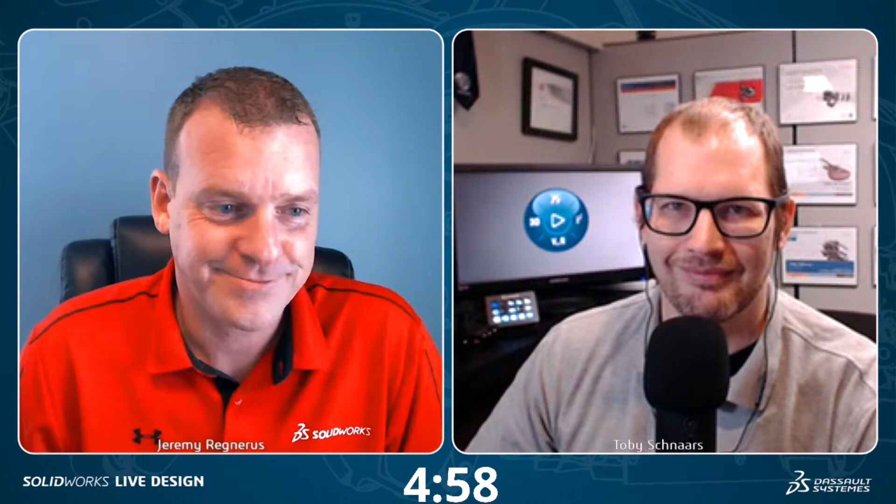Okay, so 3, 2, 1, I'm pressing go live button. So the other thing they talked about, so not only was it like these two college brothers basically started Pizza Hut, they then went on and, we're live, they talked about the guys who started Domino's. It was really, really cool.

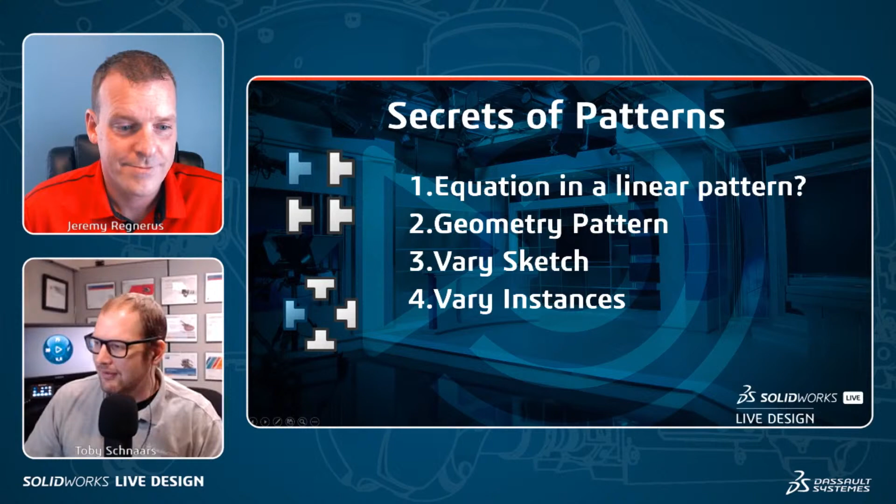I'm going to jump into SolidWorks Connected, and we're going to take a look at our first example, which is a linear pattern where our goal is to create equal spacing from the end of the part to this first hole and the other end of the part to this last hole, and to have that value derived from the overall length and the number of holes itself.

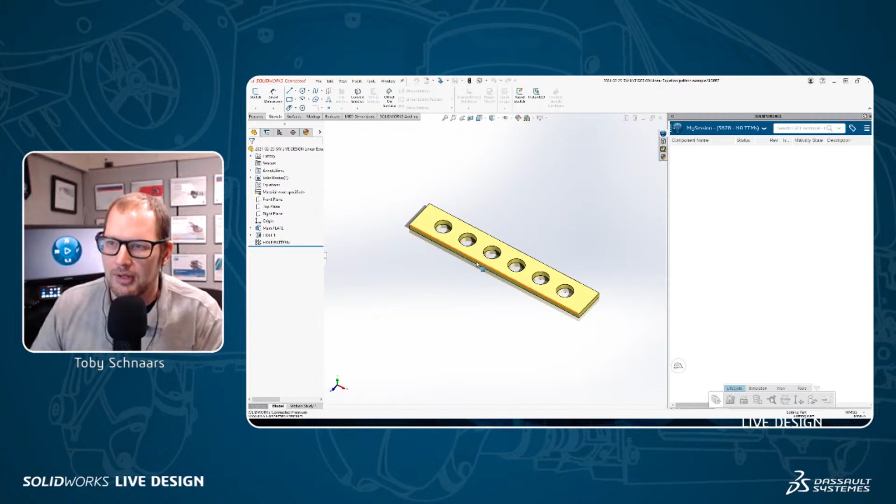So we're going to take the overall length of this part. We're going to divide it by the number of holes. That's going to give us some equal spacing. But we also want that to incorporate the distance from the end of the plate. We want that to be uniform. We want the distance off of each end to be the same.

So I'm just going to start a new part here in SolidWorks Connected 2021. From this new part, I'm going to jump into a top plane, begin a sketch, orient my view, pretty much the same workflow every time, right? Select a plane, begin a sketch, orient your view. When you're using SolidWorks, one of my favorite things is to use auto dimensioning. So I'm going to make this 30 by 160. I'm kind of shooting from the hip here a little bit, Jeremy.

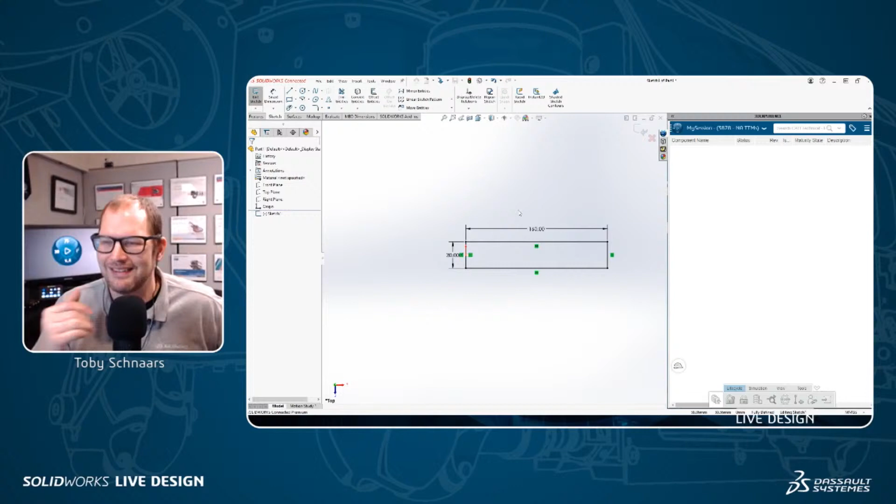So we're going to take this guy here and make it midpoint, and I'm going to be doing equations here. I've watched a lot of your presentations on doing equations, and one of the tips that you've given that I think is really good is that when you're working with equations, you can rename your dimensions.

So I'm going to make sure that Instant 2D is not turned on, because if Instant 2D is turned on, when I click on the dimension, it's going to put me into an edit function. So Instant 2D is not turned on, and then I'm going to click on that dimension, come over here, and call this dimension width. So that's the width of the plate.

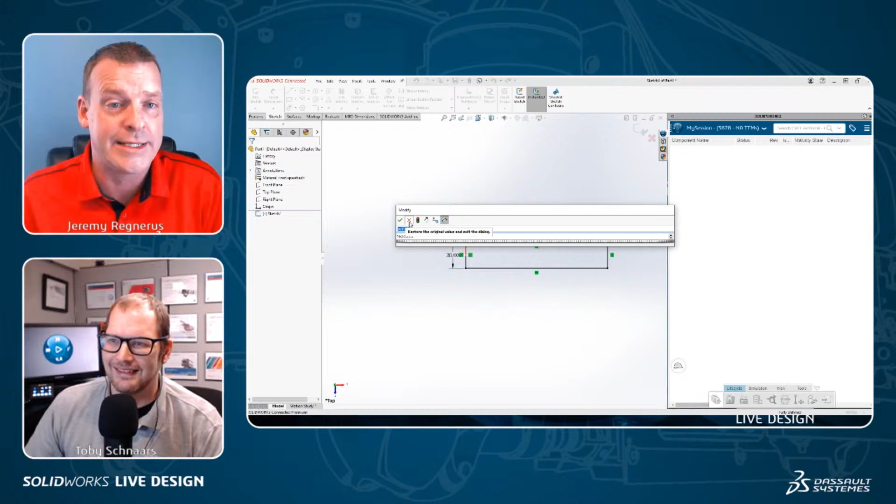So Toby, can I show you a pro tip here that you can do while Instant 2D is on? I don't mean to detract from what you're showing. Please, go ahead. Turn on Instant 2D. Okay. Quickly double click on that dimension. Yep. See, you can still name the dimension up there in the modify dimension dialog box. So that's a tip for people watching. Yes, you can do it in the property manager, but you can do it right there too. Yeah, you don't even have to go over to the property manager.

I'm still going to turn off Instant 2D because I got beef with Instant 2D for other reasons, but sure, we can talk about those in another presentation. And then I'm going to take this rectangular plate here, and I'm going to do a reverse direction and bring that down. And then I'm going to go to the upper surface there, begin a sketch, orient my view, maybe make a diameter circle here of 15 millimeters.

We're going to set that up so it's right in line with this existing origin, which is at the center of the part. And then we're going to create another dimension here that comes across. And I'm going to say that's going to be, I don't know, let's make that 22 millimeters. And now that I learned that new pro tip from you, maybe I'll press my luck a little bit and I'll call this one offset, because that's the offset from the end, right inside of that dialog box. Yeah, that looks pretty good.

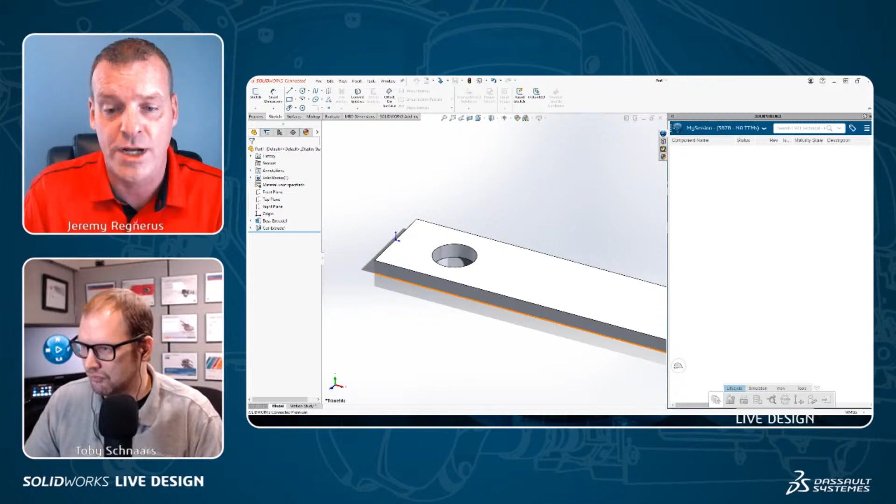By the way, Toby, Eric Beatty's in the chat. He says, dare I say at Too Tall Toby, am I starting to see a pattern here? Well, shout out to Eric Beatty. He's always in the live streams. Yeah. Super power user. I see a pattern of Eric Beatty all over 3D Experience World this year. Yes, man, you were all over the place. That was awesome. So, all right.

So we got our first hole here in this model. I'm going to just kind of close this property manager, its task pane over here. Now, what this task pane is doing over here is it's just giving me some additional access to maybe some additional tools. But I think for now, I could probably just kind of minimize that so that we can keep going here on this first example.

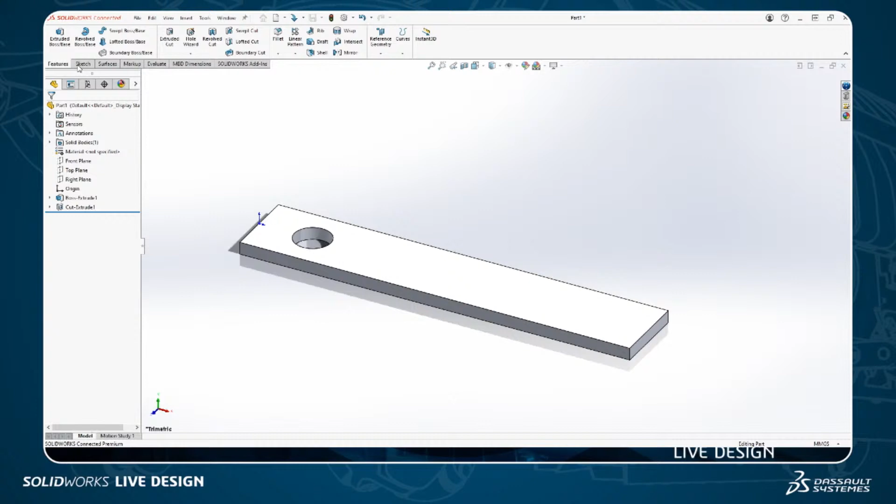So what we're going to do with this first example now is we're going to take this hole and we're going to do a linear pattern. So we're going to go here, features, linear pattern, and we're going to say it's going to run along this edge, and the feature that we're going to pattern is going to be this hole, and we'll say maybe this is going to be 25 millimeters for the spacing. All right, that looks pretty good, right?

Kind of gets us started, but we didn't incorporate any of that cool functionality we were going to talk about, right? So let's say we're going to go to the number of instances here in our pattern, and we're going to go to the spacing in our pattern. And just like we did before, we can rename them either over in the property manager, or we could rename them by double clicking on the dimension. Shout out to Jeremy for showing me that tip. So this would be number of holes.

And you can see here that now we can double click on the spacing, and we can say, instead of this being 25, we're just going to type the equals on our keyboard. And we can come down here and we can single click on this plate, and we can single click on this dimension. And now the spacing in that pattern is going to equal the width of the plate. Well, that's not exactly what we want. So let's type the little slashy here for divide.

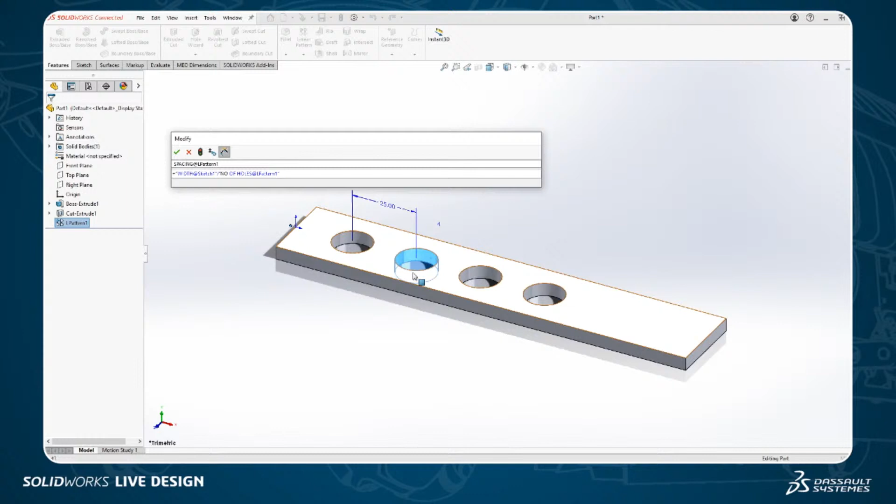And then we're going to click on the feature that represents the linear pattern. And we're going to click on the dimension that represents the number of instances. And so now we can see that the spacing of the holes is going to be derived from the overall width of the plate divided by the number of instances in the pattern. So we hit the green check mark and we rebuild, and wow, that's amazing. Look at that. It's automatically updating that spacing. If we change the width of the plate, it's going to automatically update.

And at first glance, it kind of looks like it's good, but upon further inspection, what you'll start to realize, and you can kind of even see this in the results here, is that the spacing from the end of the plate is not quite correct. So, for example, if I was to change this to 7 instances, we want that spacing from the end of the plate to be the same.

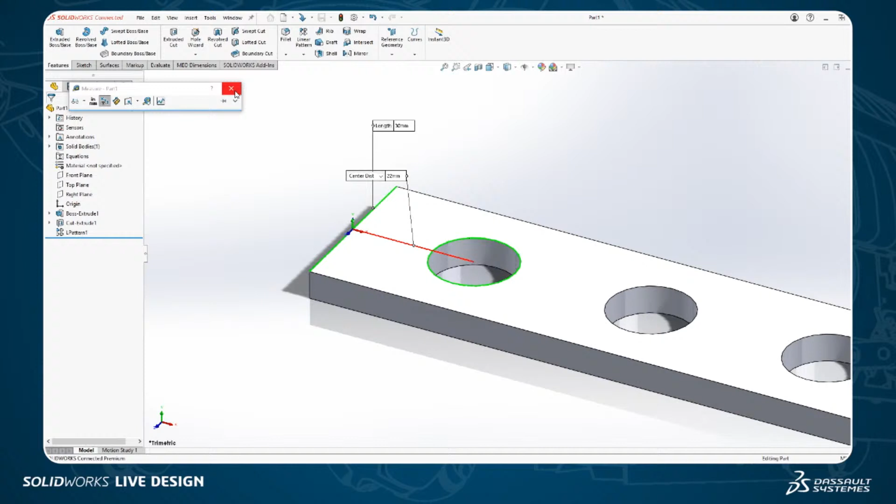One way that you could kind of quickly see this is you could go into your measure command. So I'm just going to go S key, and I've actually added measure to the S key. And then I'm going to click this circle here and click this edge. And we can see that offset is 10.14 millimeters, when it's supposed to be whatever we created on this end. So the actual equation that we have to put in there is a little bit difficult, not super difficult, but it's a little bit difficult, right?

Basically, what we need to do is we need to say that we want this distance here and this distance here to be subtracted from the overall plate. So we want to take this overall width here, and then we want to subtract 2 times this distance. Let's say it's 2 times x. So we want to take the overall width and subtract 2 times x, and then we want to divide that by the number of holes, but we want to eliminate one of the instances of the holes because the first instance of the hole is already accounted for with that initial offset sketch.

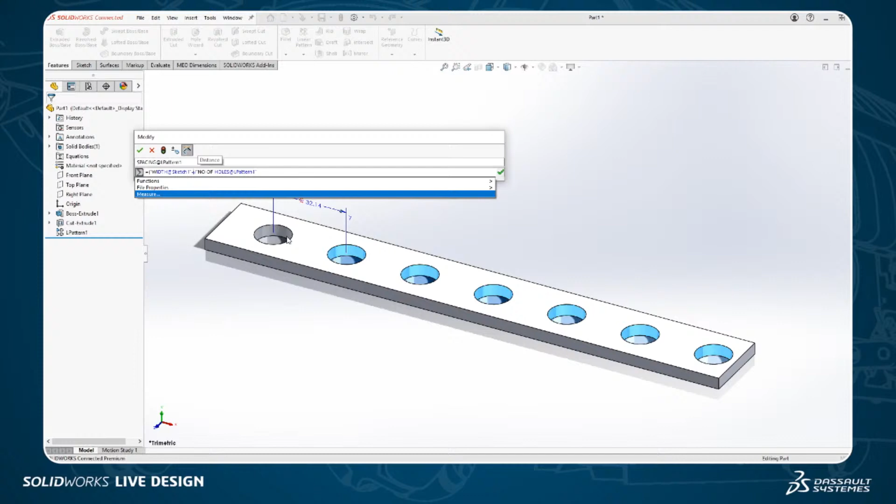So the equation starts to become a little bit cumbersome. It ultimately ends up looking something like this. This spacing here that we're trying to auto-calculate is going to equal, and then we'll do parentheses here, the width of the plate minus the original offset distance times 2, because we want it to be offset from both sides. We want it to be the same. And then that's going to be divided by the number of holes, and I'll do another parentheses here, and I'll do minus 1 and then another parentheses. And we'll see if we got it correct. Looks like my syntax is off a little bit there.

So this sounds kind of hard what you're doing right now, Toby. This is a lot of work to put this together. It's a lot of work, man. In fact, I'm gonna cancel out because you're gonna sit there trying to get it to work, and ultimately you might run into similar issues where it just doesn't work for you, or you just can't get it, or you're spending quite a bit of time trying to figure out what is it that I'm missing, what step am I missing.

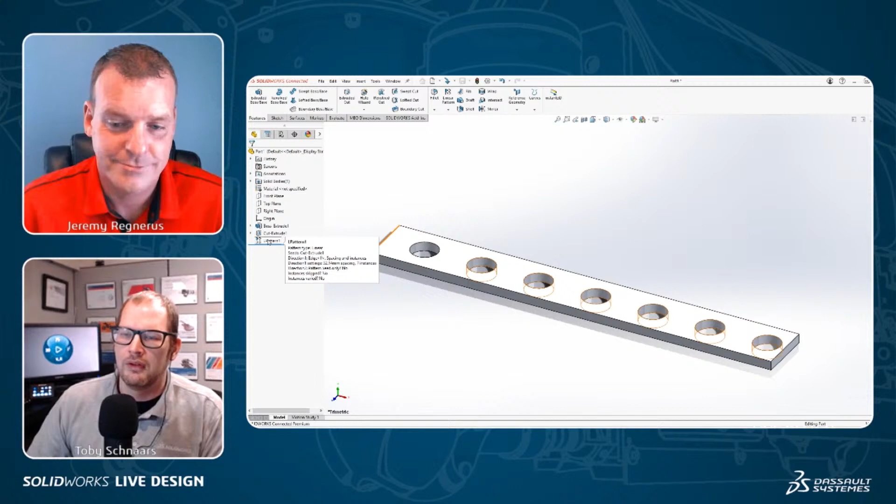So instead here, what we can see is that if we go into the linear pattern command and we say that we're going to linear pattern from this edge here and we're going to linear pattern this feature, we could actually go right up here into the linear pattern dialog box. And in the linear pattern dialog box, there's this option for up to reference. So instead of having a distance between each instance and a number of instances, what you end up with here is what's the reference that you want to go up to? Well, I want to go up to this final face here.

And then you get this option down here for, do you want to have equal spacing between the holes, or do you want to have a total number of holes and then automatically let SolidWorks calculate the spacing between them, which is the exact equation I was just struggling with, couldn't get the syntax right, didn't know what I was missing. On top of this, you can even do an offset. So I could say I want this to be offset 35 millimeters from the end. So now this distance from the end to this hole is going to be 35.

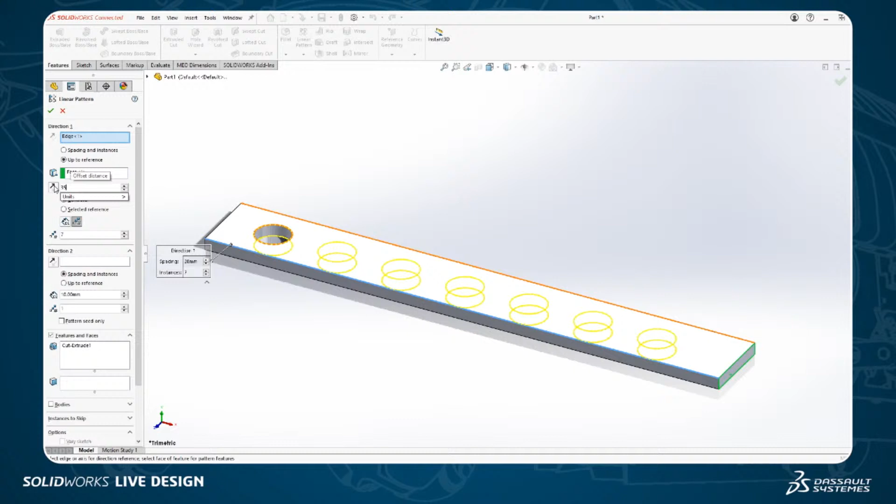And it doesn't look like 35 was right, and I can't remember what the original dimension was that I used. Well, we can go right into this dialog box and type equal, and then click on that first instance to get its dimensions to show up, and click on the dimension that represents that first instance. So let me just make that 35 for now. The dimension's not showing up, so I'm going to leave it at 35, and then double click on that linear pattern. I'm going to double click on this dimension here, type equals, and then click over here on the first feature, and click on this dimension.

So my offset from this end over here is now set up with an equation to equal my original offset from this end here. So I'm going to hit the green check mark. Rebuild, boom, good to go. So cool, right? This is so easy.

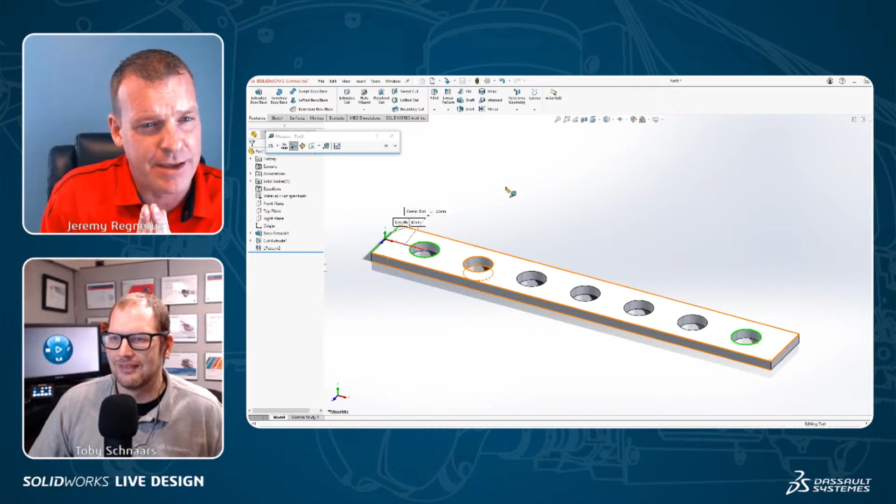So this was like a stealthy little feature that got added. I don't remember. It's probably been within the last 4 releases, I want to say, maybe 5. I remember when this came out going, every machine designer who has to build a block with equal space holes on it is going to love this thing.

It works so good. It's like you said, it's kind of one of these things that's just been added into the software. Maybe you didn't realize that it was added here, and you can see that what we end up with is just right in this dialog box, this little tiny addition here, this up to reference that makes all the difference and can really simplify your life.

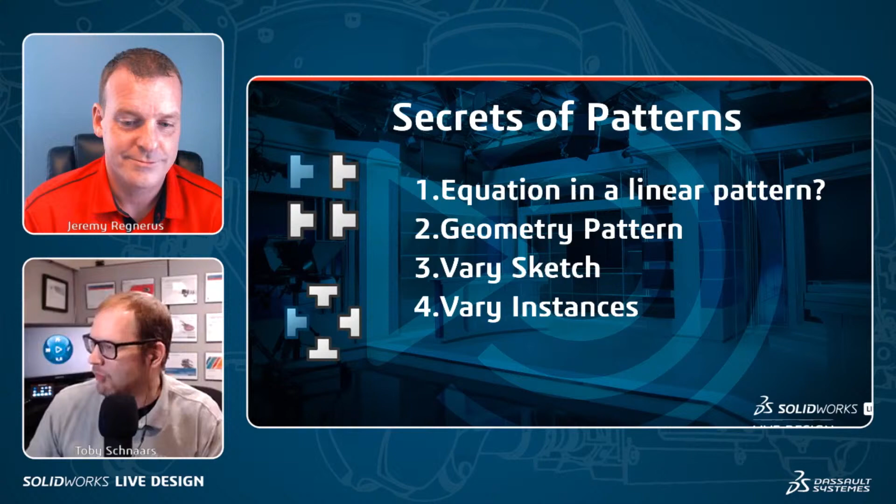Yeah. So at this point, I'm going to jump into the geometry pattern discussion, because we've all gotten this error before with geometry pattern, and we're trying to figure out what exactly is happening there. Why are we running into that error with geometry pattern? And so what we're going to see is the reason that error shows up, the challenge that you run into when that error shows up.

Can we show that error so people can see what we're talking about? Absolutely, yeah. Let me open up a file here. You can see this file is coming in read only because I'm actually managing this with data management in the cloud, and somebody else maybe is working on this file, so I'm being blocked from making changes, but we can still take a look at what that error looks like. And then maybe in a little bit I'll reserve this file so I can start making changes, because I think I got some revisions coming up for this file.

So you can see the anatomy of this file, the way this file was created, was that it started out with this main base shape. As I roll forward in the tree, we have this little set of divider slots and then these upper pockets. Now, the offset on these upper pockets is a little bit different, and that's why I didn't include that in my linear pattern feature. I've created this inner pocket, then a half circle boss here, and then some little fillets on the corner. My goal is to take this geometry and lay it into all these other pockets.

So I'm going to jump into the linear pattern command, click on this little edge here, and specify my spacing. I'll say that my spacing here is 50 millimeters, and there's 4 instances. I'm going to come down to my features and faces, and then choose those features, maybe from the graphics area or maybe from the tree.

Either way, I can get those features. Ooh, my pattern preview looked like it was there at first, and then it kind of went away. Yeah, what happened with that? I don't know. It's weird. When I click full preview, it goes away, but when I click partial preview, it's there. So I don't know. It'll probably work, right? So we'll hope that partial preview fixes it.

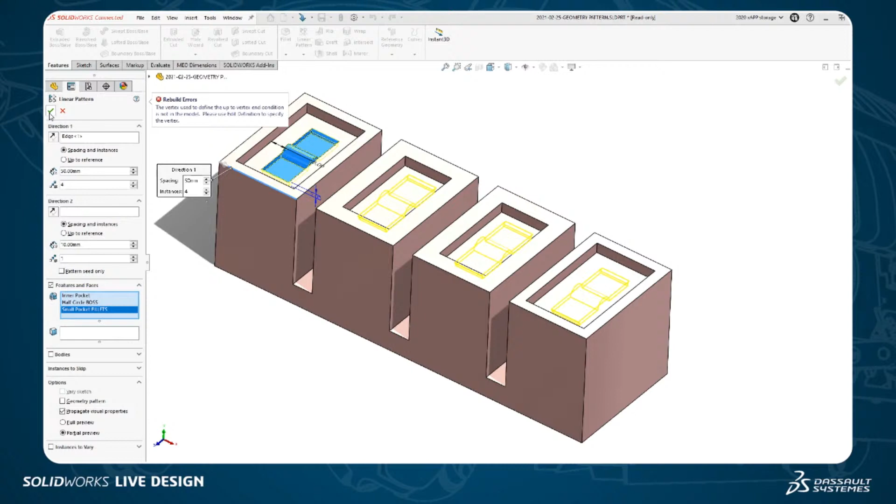So we'll hit the green check mark here, and when we hit the green check mark, we see rebuild errors. The vertex used to define the up to vertex end condition is not in the model. Please use edit definition to specify the vertex. And a lot of times what you'll see is kind of a similar error here, where you'll see something like pattern failed to create, try to use geometry pattern.

Like in this example here, if I wanted to take the spoke here and create a circular pattern of the spoke. So I'm going to do a circular pattern here. Let me go before I put that hole in the middle. We'll do a circular pattern here of this spoke. And from the circular pattern here, we're going to say we want this to be equal spacing, and we hit the green check mark. And it says, pattern for sweep with guide curves is not currently supported without the geometry pattern option. Try using geometry pattern option.

Now, believe it or not, both of these errors, even though they're saying something slightly different, the culprit in both of these errors is the same thing. And the culprit is the idea of geometry pattern, which is really a derivative of the idea of a pattern that tries to solve for end conditions dynamically.

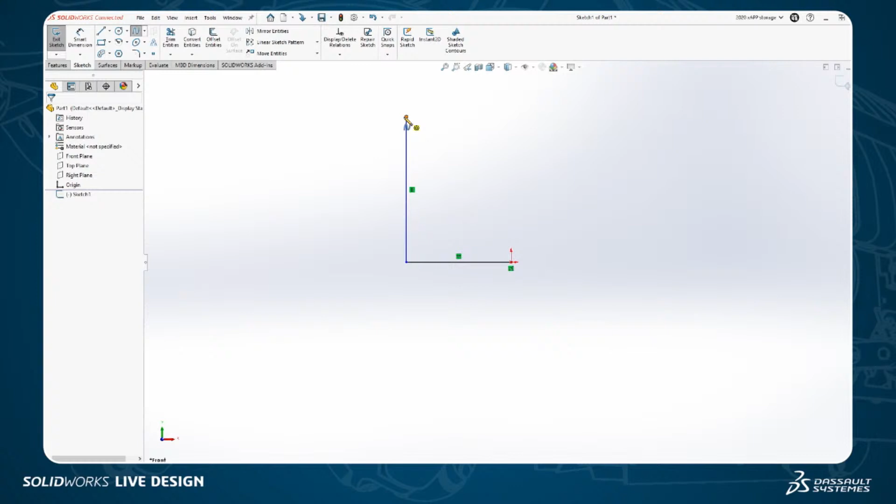And what that means, and really how you can visualize that pretty easily, like if you're talking to a coworker and you're trying to explain this, what you could do is you could create a set of geometry that has some kind of a unique topology. Usually I'll do something like this. Like I'll create a little spline here off the top of a thin feature extrusion. And you can see that I can bring out that thin feature extrusion like so.

And then what I'll do is I'll pick this face and begin a sketch of a circle, and I'll extrude that circle up with a dynamic end condition. So what I mean is something like an offset from surface. So I'll go offset from surface here, and I'll pick this face right here. And there we can see our extrusion going up. Let's say we're going to bring that off 50 thou from that surface.

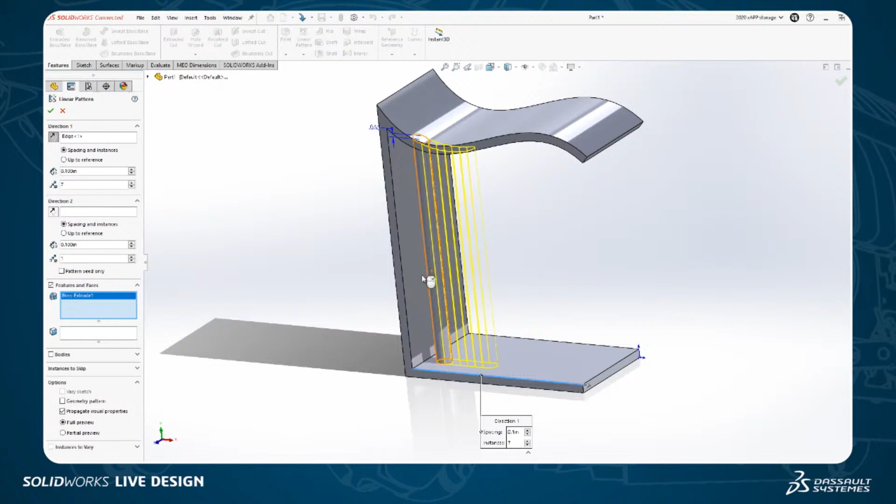Now we're going to create a linear pattern of that boss extrude. So we go to create a linear pattern of this boss extrude. We say we're going to go in direction 1 here. We say that we're going to use this boss extrude as the feature. And we say we want our spacing to be, say, 0.1 inch. Looks like a pretty cool pattern. I'm going to hit the green check mark, and whoa, that's kind of cool. That's awesome, Toby, that it will follow that surface on every instance.

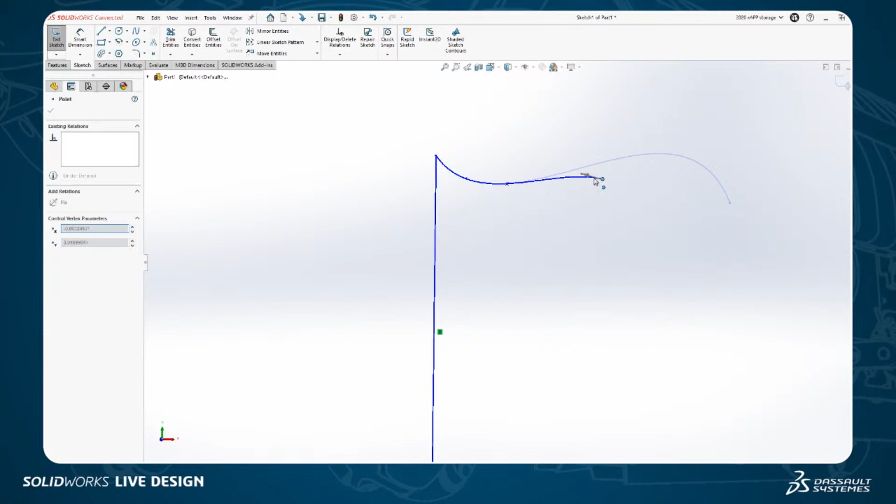Exactly. The end condition, the dynamic end condition is solved throughout the duration of the pattern. So this instance is doing offset from surface. So is this one. So is this one. So is this one. So that's beautiful unless this spline doesn't extend out far enough. When that spline doesn't extend out far enough, that's when you start running into issues. So for example, if I was to dial this spline back a little bit here, like so, let's see what happens to our pattern.

Uh-oh. The end face cannot terminate the extruded feature. Please recreate the feature using the geometry pattern option if intended to mirror pattern the feature onto disjoint bodies. So you'll notice here that over the years, the team at Solidworks has done a great job of trying to give you a variety of dialog boxes that will maybe help you to decipher what's going on with this error. But ultimately, they're all saying the same thing. You've got some kind of a dynamic feature in your base feature, and it can't solve in the patterned location.

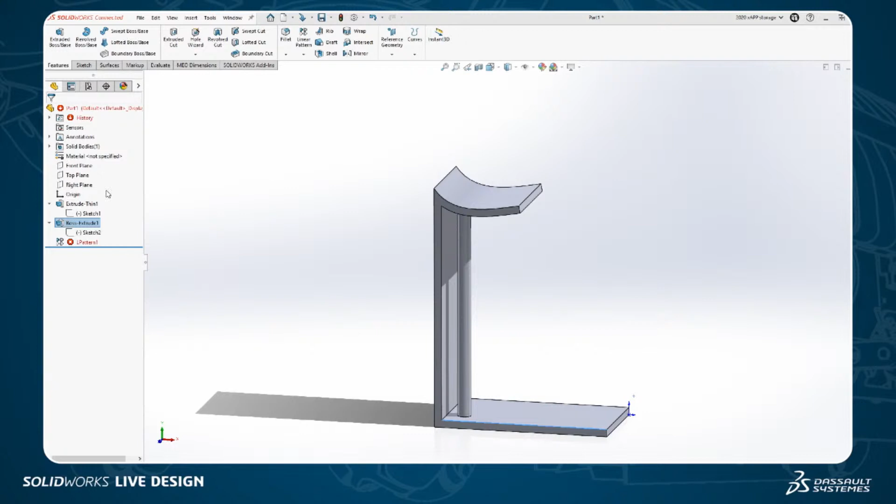That might be that you're doing a fillet and the faces that you're trying to fillet onto don't exist in the new location. It might be an up to surface or an up to vertex, and that vertex doesn't exist in the new location. You know, there's a number of reasons why this might happen. But ultimately, what you'll see is if you go into the edit feature command on that pattern and you choose the option for geometry pattern, what you get is an exact duplicate of the original.

And so this is why you will see that suggestion often, and this is kind of how you can work around it and what the result is of working around it. So if we return to the spoke example, and we go to create our circular pattern of the spoked features. So we got our spoke sweep, our spoke fillet 2, and then we've got our direction 1 right here. And this time we're going to say, let's do this with geometry pattern. We hit the green check mark.

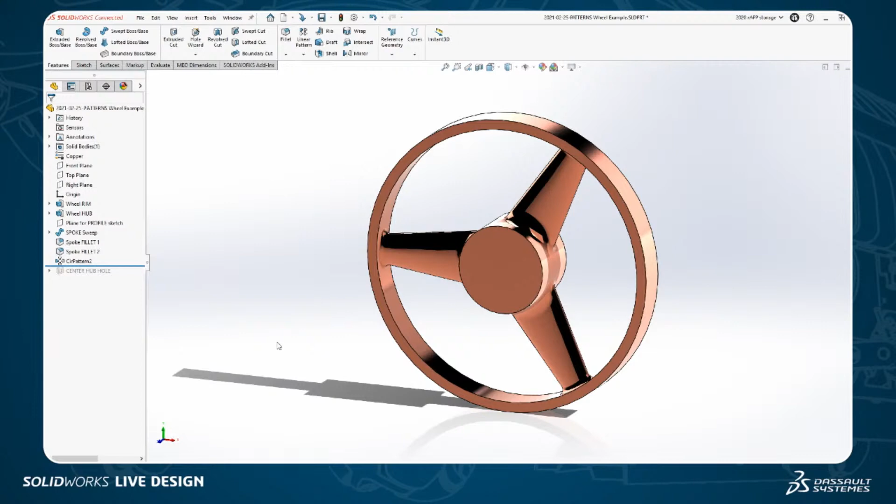Hey, it worked. And if we go to our extrusion here, I think a lot of times it's not only important to see that it works, but maybe even to dive in a little bit and try to figure out why it worked. In the case of this feature here with the half circle boss, the dynamic end condition of this half circle boss is to go up to vertex, up to this vertex right here.

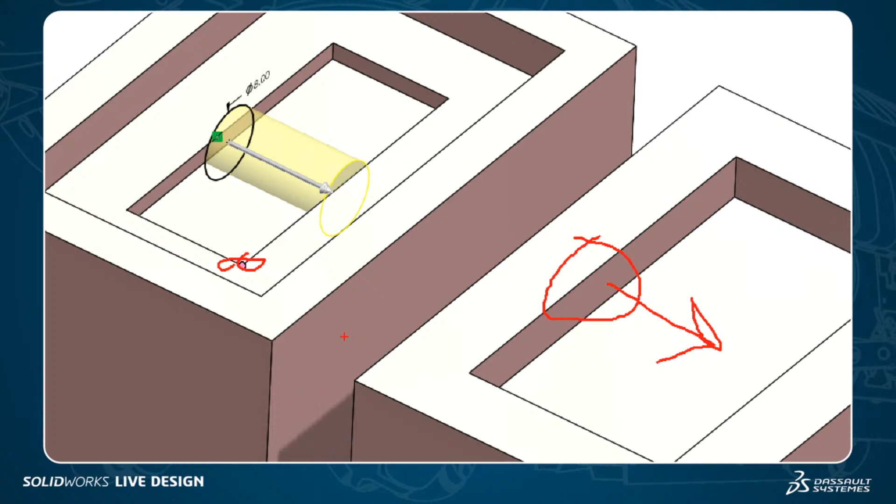So I'm boss extruding from this location in direction 1, which is a polarized direction. In this case, it's positive X. I'm going in direction 1 in positive X, and I'm ending up at this vertex here. Well, you can kind of ask yourself, if you had a circle here that was extruding in positive X, would it be able to terminate at this vertex here? No, right? It's not going to be able to go positive X and loop around and end up at that vertex. So that's why you end up getting that fail when you do the pattern.

But ultimately, what we can see is if we attempt to do the pattern again, and we use that option for geometry pattern, so we're going to say this is going to be our direction, and this is going to be our distance, 50, and we'll make this 4 instances, and we'll say geometry pattern on, hit the green check mark. Beautiful. It works. We're golden. Toby, that's great.

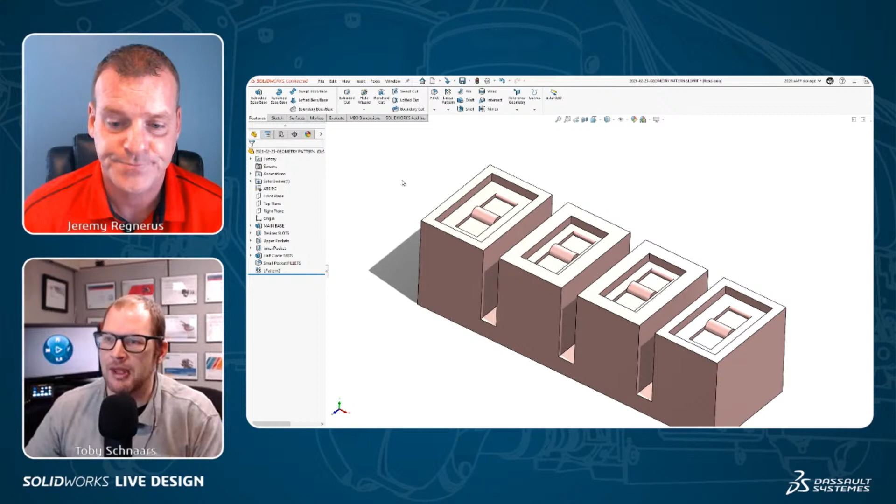I think there's a few caveats we should probably tell the audience about with this, though. So let's be really clear. When you use geometry pattern, all you are patterning is just the identical geometry you created. So if you wanted some form of intelligence in there, you really want to understand in your example that up to vertex. Is there a better way to define that feature to get it to maintain that it's intelligent as it's moving on? That's a great point, Jeremy, because you know what can happen sometimes is that, let's say

I do something similar here, but this time I'm going to start at this face. So I'm going to start at this face here, and I'm going to say I want to make a circle, and I want to extrude it, and I'm going to make the end condition up to surface. So I'll just double click on this surface. You'll notice over here that automatically changed the dynamic end condition to up to surface on this face here. And so now we're going to hit the green check mark, and we're going to create a linear pattern of that. So I'm going to do linear pattern in direction 1 with this as the feature. Same as before, right? 4 instances, geometry pattern not enabled.

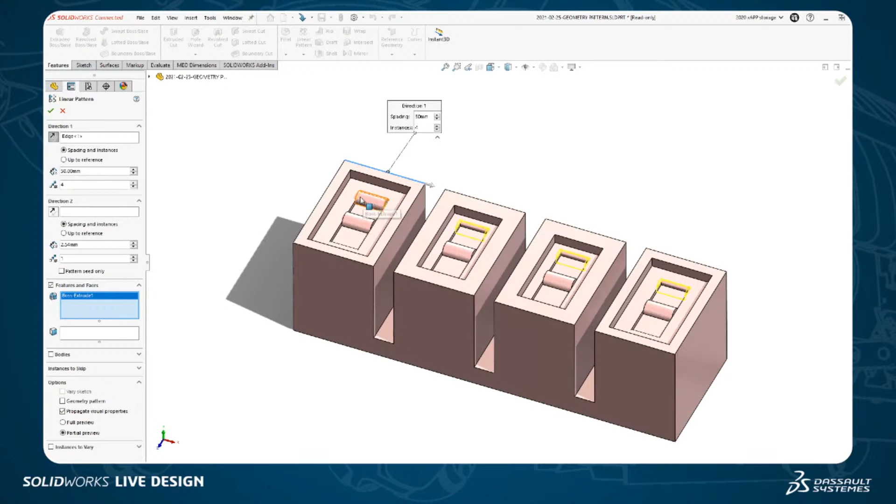Well, what's going to happen here? Each of these pattern instances is going to try to go up to surface and go up to that same surface. And so I end up with something like this. Kind of weird, right? Maybe not what you would expect, but a great illustration of how geometry pattern works. And this is an opportunity to say, oh, maybe it would have been better if I would have just done that blind rather than trying to make it dynamic. Or maybe it would have been better if I would have done geometry pattern to make sure that the copy is identical rather than trying to dynamically solve. So even here, even though I didn't get an error, geometry pattern could still be the best solution.

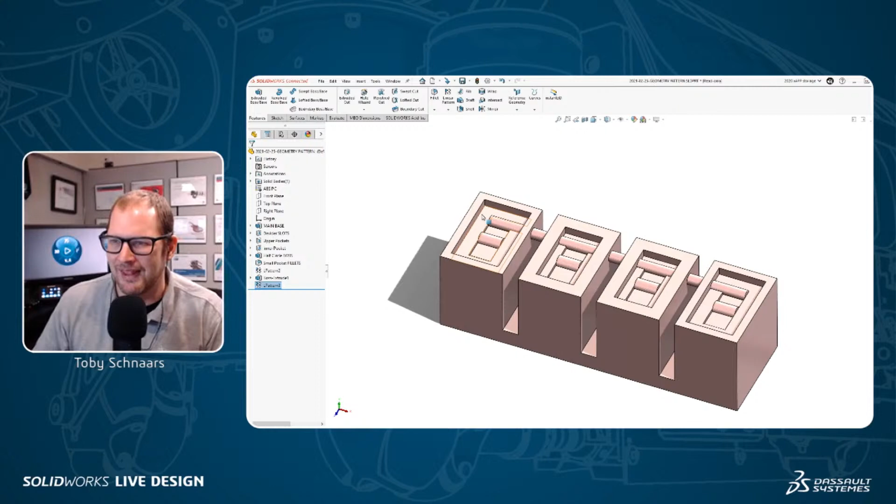In this case, it's saying I can't geometry pattern this anyway because of another criteria that's missing on that one. Ultimately, I think it's this face here not being present. So, but yeah, that's another good one to know about, the use of that dynamic end condition. Sometimes you just end up turning it off, even though you're not getting an error, just because you're not getting the geometry that you want.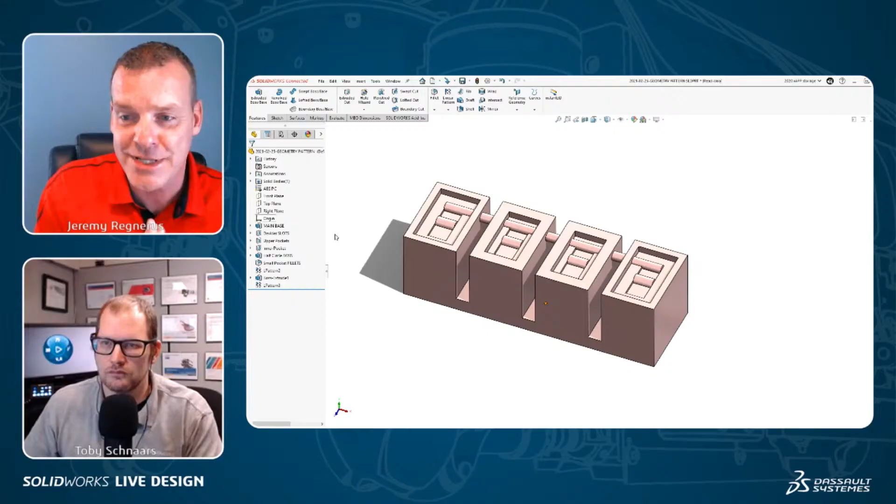And then one other question I want to jump into here. Michael Steves, one of the guys who will be on here next week, actually points out that geometry pattern can also help improve the performance with this option using performance evaluation. Yeah, that's a great point. I noticed that as well. This is always a great tool to know about. You find this tool here on the evaluate toolbar. So you can see here, I went to the evaluate toolbar and I went to performance evaluation.

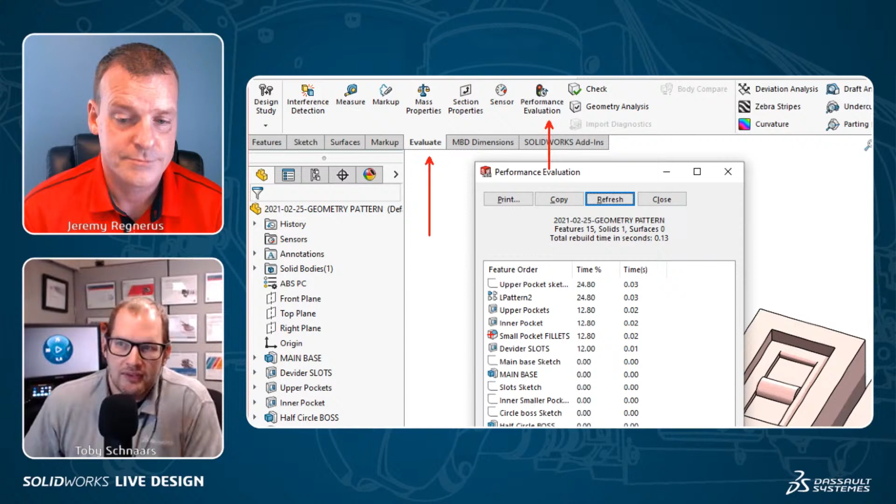These are the kinds of questions that we often get. Things like, which is faster, doing it as a sketch pattern or doing it as a feature pattern? Which is faster, doing a cut extrude or doing a shell? This is where you can go to answer that question. You could create your pattern using the geometry pattern option off, and then create the pattern using the geometry pattern on, and you're going to see here what the solve time is for that feature. So you can find out the answers to those questions, which is faster. And Michael makes a great point.

When you're creating a pattern, this is something that we talked about a lot in Essentials too. Let's say you've got a perforated board and you're going to have 1,000 instances of a rectangular cut extrude. Well, you could make that cut extrude blind, or you could make that cut extrude up to next or up to vertex, something like that. As you guys just learned, every instance of that 1,000 instance pattern is going to try to solve for that up to next or up to surface. And that's going to make for a much longer rebuild time than if you had just made that feature blind.

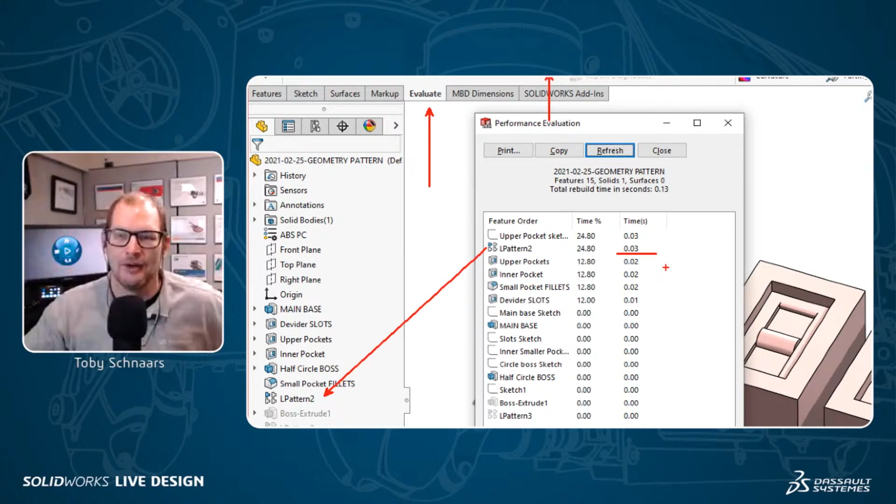Now, what Michael Steves is pointing out here, which is another great point, is the other thing you could do is make the first one through all or up to surface or up to next. And then you could do geometry pattern. And that way each copy is kind of a dumb copy, or a non-dynamic copy. I should say it that way.

I want to address, I've seen this question come up twice. I think there might be a bit of a language barrier here. Maybe, Toby, you could help me decipher this. How can you populate a sketch by a part? I think maybe the wording here is a bit challenging. So, Albin, if there's a way you can re-ask that question, maybe we can address it. Or Toby, do you know what he's referring to there? I don't know. Okay. So Albin, maybe if you can rephrase that question, we could ideally address that. Cool.

And I see also Deepak was asking if there's a repeat command tool. That's always a good one to remind people about. You'll see here if I go to the fillet command, let's say I'm going to do just a regular edge fillet here. I'll click on this edge, and then I press enter to finish the command. But then if you press enter again, that takes you back into your most recently used previous command. So repeat command is just enter.

Always a good one to know about if you're doing a lot. I do that a lot with delete face. I'll do delete face and delete like 4 faces, finish the command, then just press enter again, delete face again. Because a lot of times when you delete, it deletes and patches, and then you have that patch region which you're using to construct the next delete. So always good to know that you can repeat that.

Hey, Toby, it's a bit rhetorical. Can we look at where did you find that performance evaluation again?

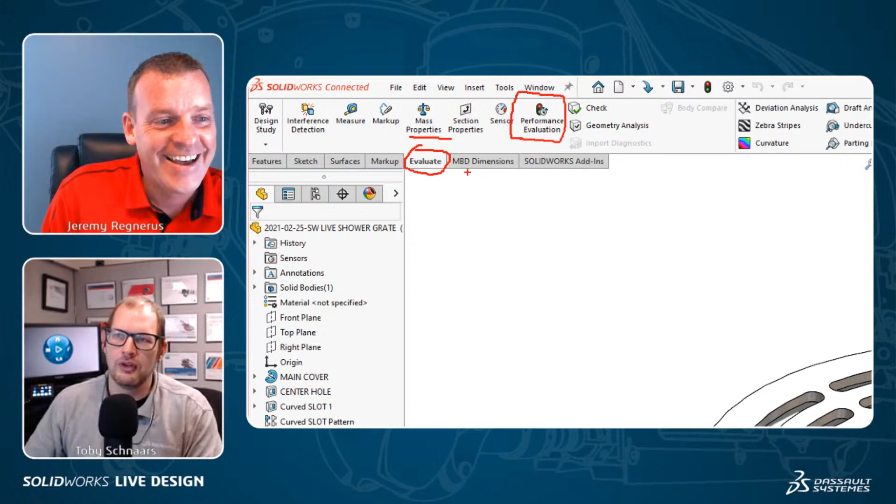So I want to reiterate, this is a cool tool here. So let's show everybody where they can find this. Yep. So you go to the evaluate toolbar. Oops, I almost circled the wrong one. And then you go to performance evaluation. So you could go Tools > Evaluate, or you could go to the evaluate toolbar, and then it's called performance evaluation. This is a great tool.

It helps you find out, if you have a part that's running slow, this is a good tool to help you diagnose what features may be having an impact on it. In assemblies, you can leverage this tool in the same way. You can find out what parts are really slowing things down. So really useful tools in SolidWorks to figure out where maybe some of your bottlenecks are. Yeah, for sure.

So I don't want to keep you, Toby. I know you have a ton more stuff here. I'm gonna hand the reins back over to you. Yeah, sure. When you said I don't want to keep you, I thought you were gonna say I know you got a lot to do today. No, not at all.

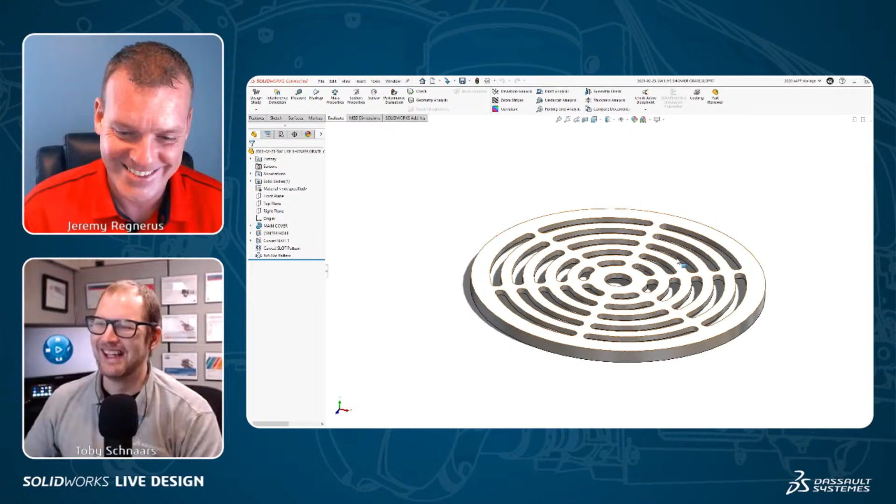I'll take it from here. So we talked in the last example about how features will dynamically update based on their dynamic end conditions. A dynamic end condition is something like up to surface, offset from surface, or up to next. But what about sketches? Right? Look at this model here.

This looks like a pretty complicated model, but before I break it down, I just want to come up here to my data management in the cloud and make sure that I've reserved this file. You can see right here there's a little green key, so it says reserved by me. So now I'm not going to get any of those read-only messages. That means I can make some changes, maybe even make a new revision, right?

So Toby, really quick, where are all your files that you're working from? Are they on your computer? Is this SolidWorks PDM, or is this somewhere else? Well, technically they are on my computer, right? But as a very simplified explanation, as soon as I hit save, it's pushing up to the cloud.

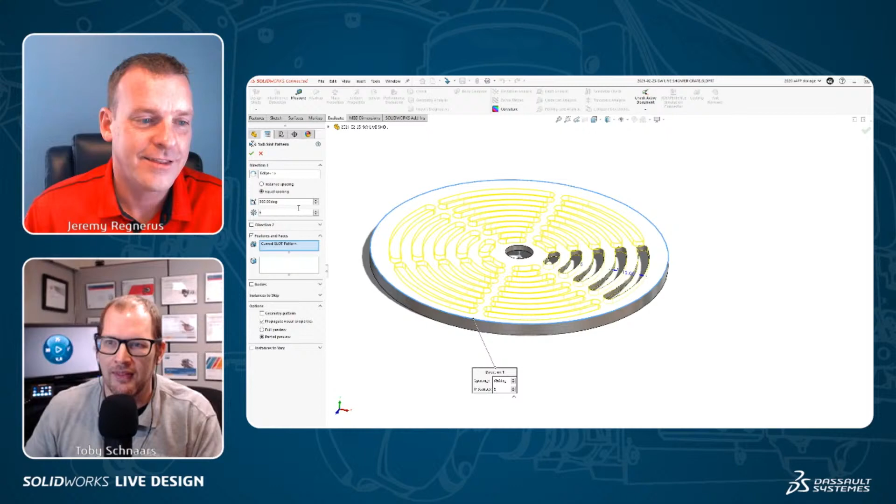So let's say I change this pattern from 6 instances to 5 instances. I get feedback in the task pane, and this little icon is saying the version that you're working on in RAM is different from the version in the cloud. So I can press Control S, just a regular save shortcut, and not only does it save to the temporary local cache, but it also pushes that up to the cloud.

So now the version in the cloud that the rest of my team sees is the same as the version I have open in RAM, and I can tell that by this little green check mark. So if you jumped on another computer with SolidWorks connected, you could access all those files regardless of where you were in the world. Just grab the file, start working. That's awesome. Yep. I love it.

So let's take a look at how this model is constructed. It starts out with a real simple revolve sketch to give us the main cover. Then we have a center hole right in the top of the model, just a regular cut extrude. And then we have this curved slot, and this is kind of where the magic is happening.

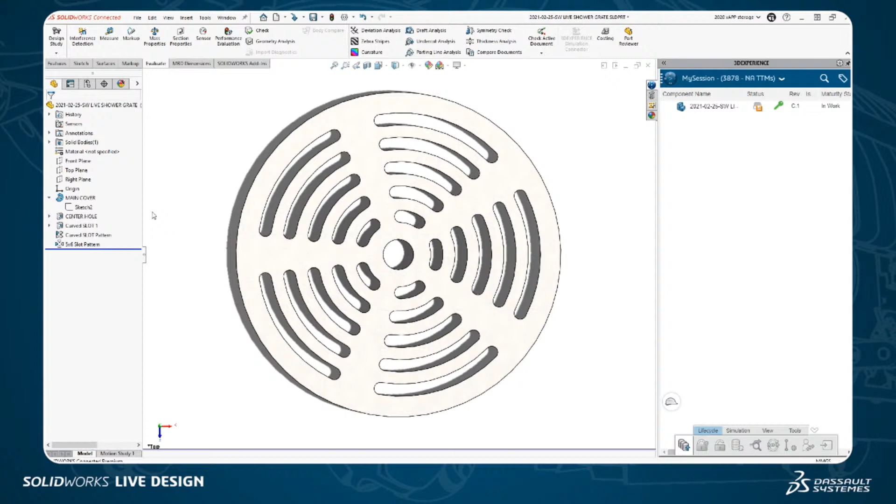In fact, I'll just delete everything from that curved slot down so that we can see what's going on in that sketch itself. The sketch is constructed by creating a curved slot feature, which is this feature here in the sketch toolbar. So we create this curved slot, and then I'm creating a tangency relationship here and a linear dimension off center.

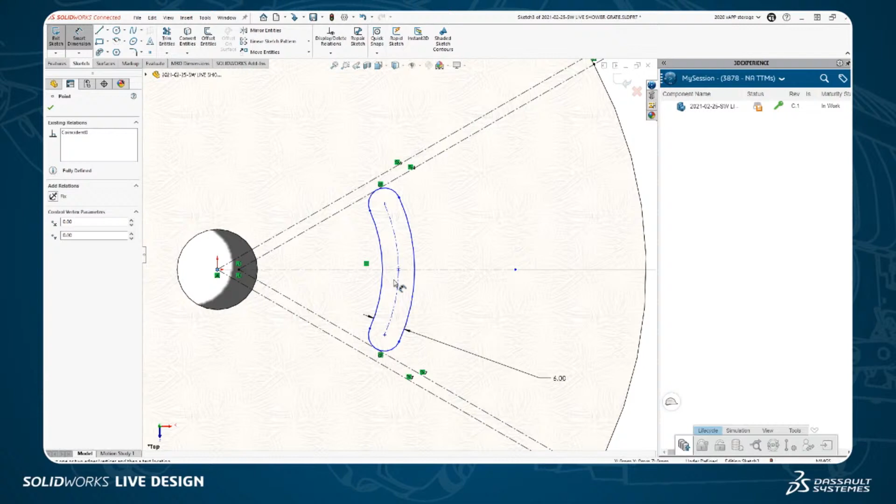So right now I just got rid of those two relationships just so you can see what I'm doing. So I'm taking this top arc of the curved slot and I'm making a tangent to this angled line, this bottom arc of the curved slot, and I'm making a tangent to this line. And then I'm creating a linear dimension off center. So I'm coming from center here, off center, to the center of that slot, and let's say I make that 20 millimeters. Pretty straightforward, I think, as far as a sketch goes.

But I think kind of what is the magic here is recognizing that I'm not doing a distance here for the center points of that slot. I'm not even necessarily doing an angle of the slot. Instead, what I'm doing is I'm saying I want this to be tangent here, because my goal, what I'm going to be showing you now, is that just like we could have a dynamic relationship in a feature pattern, we can create a dynamic relationship to the sketch relationship.

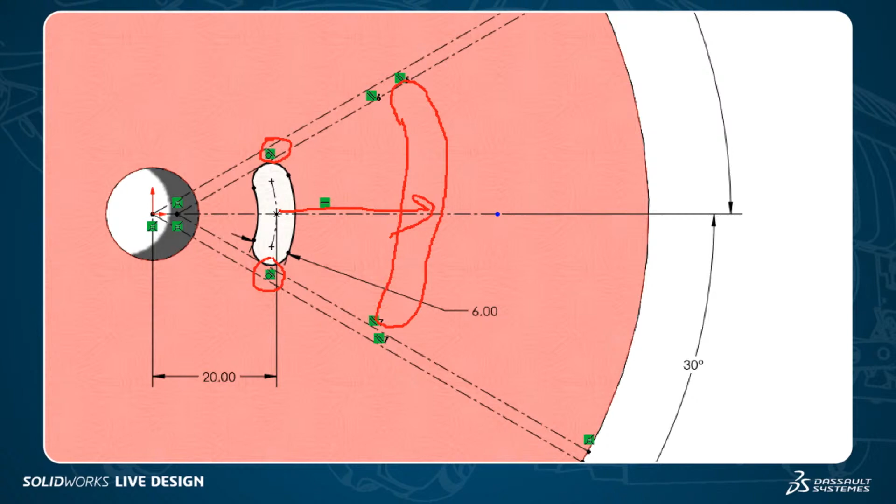So we've got this slotted hole that we originally created. When we create a pattern, we want it to follow this same tangency relationship, but in a new location. So we want that sketch to dynamically update into the new location for the pattern as well. And this is a bit of functionality known as Vary Sketch when you create a pattern feature.

So now at this point, I'm ready to take this fully defined sketch, right mouse button, cut extrude that through all, and then I'm going to click on that feature, and I'm going to say I want to create a linear pattern of that feature. Now, when I'm going to create a linear pattern, you'll notice that I don't have an edge that I can select to define the pattern to kind of radiate out from center.

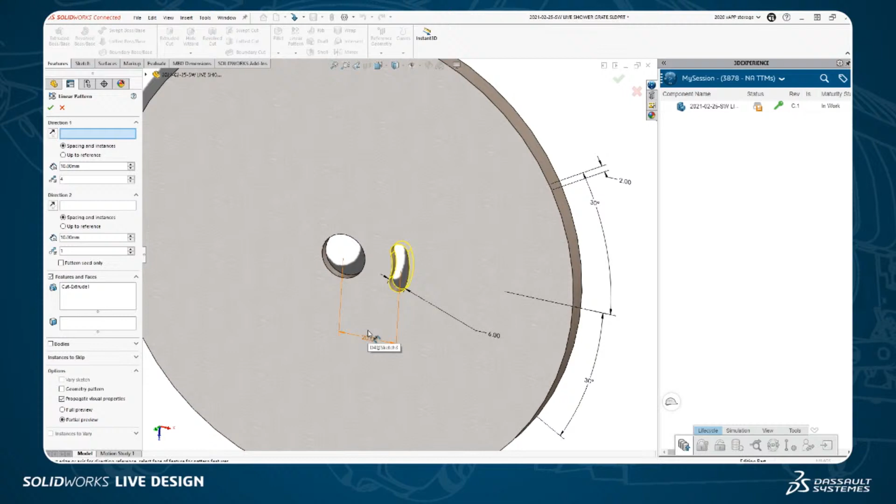But what I do have is a linear dimension, which is going from the origin to this point here. And that point A to point B defines the direction that I actually want for my pattern. So there was a bit of planning or forethought put into how that dimension was created. You know, I could have created it with a radius dimension from the center point, but that wouldn't have worked because then I wouldn't be able to select that dimension here when it comes time to create the actual pattern.

So we can see here what I'm doing with this pattern. I'm going to pattern this out. Let's say I'm going to make 5 instances of it, and they're going to be spaced out at 12 millimeters. Yeah, that looks pretty good. And I'm going to hit the green check mark, and all right, that got me close, but not exactly what I wanted. Well, in the linear pattern feature, there's this check mark here called Vary Sketch. And when you choose that check mark, that's going to allow the sketch to dynamically update, similar to what we've been describing over the past few minutes.

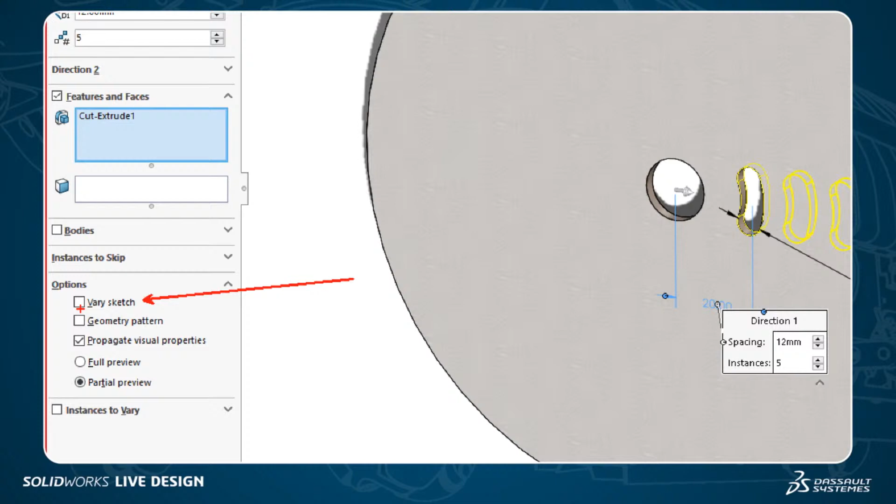Now, one thing that you should know is that tool won't show up if you pick an edge for your pattern direction. So you notice Vary Sketch doesn't show up currently. It won't show up until I pick a dimension from that sketch. So you'll notice here, I'll click on this 20 millimeter dimension. Now Vary Sketch is available. When that dimension was not selected, you see that Vary Sketch is not there. So if you try to do this and you pick an edge, you're not going to see it. I'll show you another example of that in just a few moments.

So I hit Vary Sketch, and you'll notice that the preview goes away. This is kind of thematic, right? When you're creating patterns, take a look at the option for full preview. A lot of times that will show you a preview when you're doing something dynamic. And you can see here that now I can hit the green check mark, and there we go, our nice Vary Sketch feature.

So the trick there, Toby, so let's recap. In order to get Vary Sketch, so in order to honor all the sketch relationships, the fundamental thing you have to do is pick something from within the sketch you're patterning in order to make the Vary Sketch option enabled. Yep. Dimension is probably the best way to do this because a linear dimension defines a linear direction. You got it. You said it perfect. That's exactly right. And if you don't see that Vary Sketch option showing up, that's probably why.

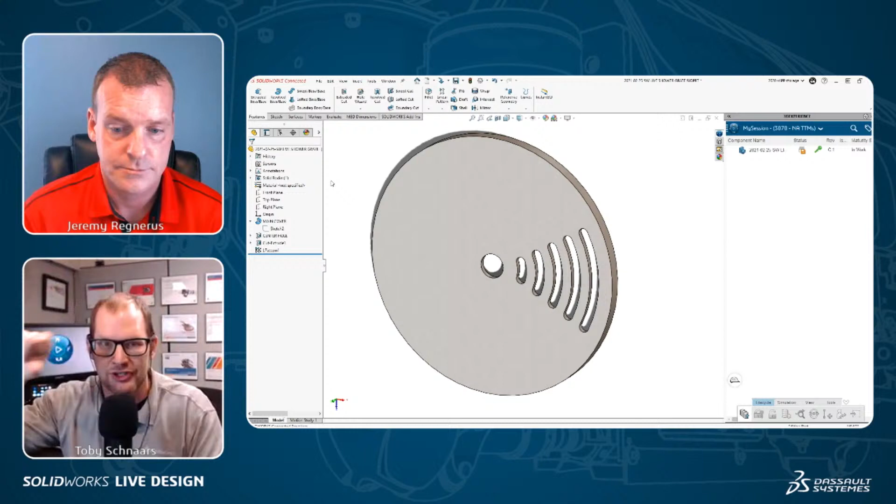And so, now you know that you can create a pattern and have the end condition of the feature dynamically update, but you can also have the sketch relationships dynamically update into the pattern instances. And so you could create something maybe like this. Maybe this is some kind of a drain where you might think that creating this slot pattern across the grate would be very time consuming.

But if we look at this sketch of the slot cut itself, so you notice if we go in here and we look at the sketch of the slot cut itself, we can see here that sketch of the slot cut itself is able to be created tangent to this upper region of the model and tangent to this lower region of the model. And that way it follows that curve all the way through.

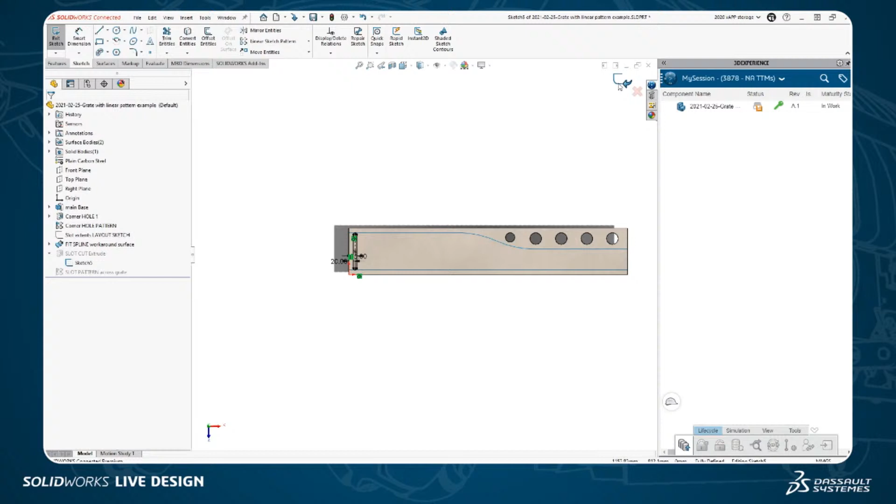Now, if we're going to get into kind of pro tips here, one little bit of magic that's going on with this particular solution is that I'm utilizing what's called fit spline. Fit spline, as you know, Jeremy, is my favorite feature in SolidWorks. Yes, it is. I love fit spline.

And so what fit spline lets you do is it lets you take something like a line and an arc and another line here, and it lets you combine them into one single spline. So right now, if I made that slot tangent to this line, it wouldn't really help me because the line only goes a certain distance of the overall pattern length. But what I could do is I could select all those entities and I could go into Tools, Spline Tools, Fit Spline.

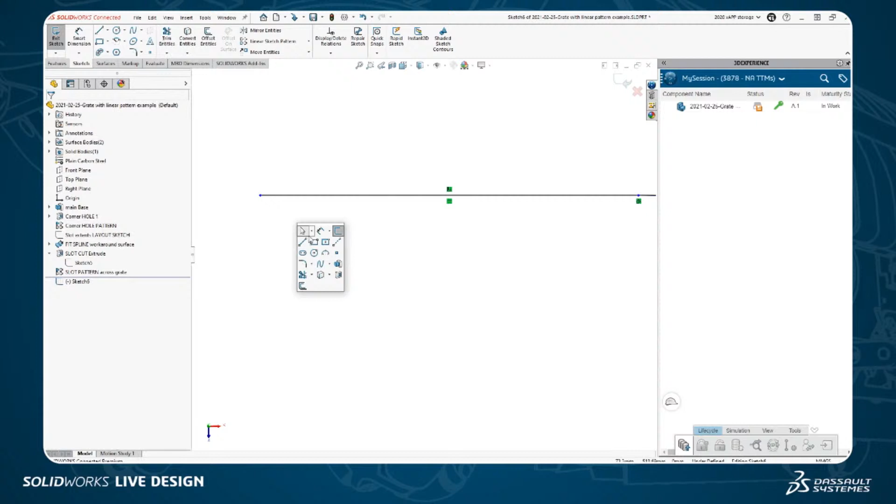Now, I've talked a lot about fit spline, and I could probably take the next 30 minutes just to talk about this. I'm not going to, but I do want to share with you that there is a limitation of fit spline that I learned while I was doing this example, and that is you can't seem to create sketch relationships to the fit spline for some reason. So, for example, I can't pick this arc and pick the fit spline and make a tangent. Just not there. I've never seen that. Yeah, I've never seen that either. I was very surprised when I ran into it.

I can't take this endpoint and make it coincident to the fit spline. Isn't that crazy? Yeah, if I drop a regular spline in there, then I'm golden, right? I take this, I can make a tangent all day long. I can take this other point, I can make a coincident, no problem. But with fit spline, I couldn't do that.

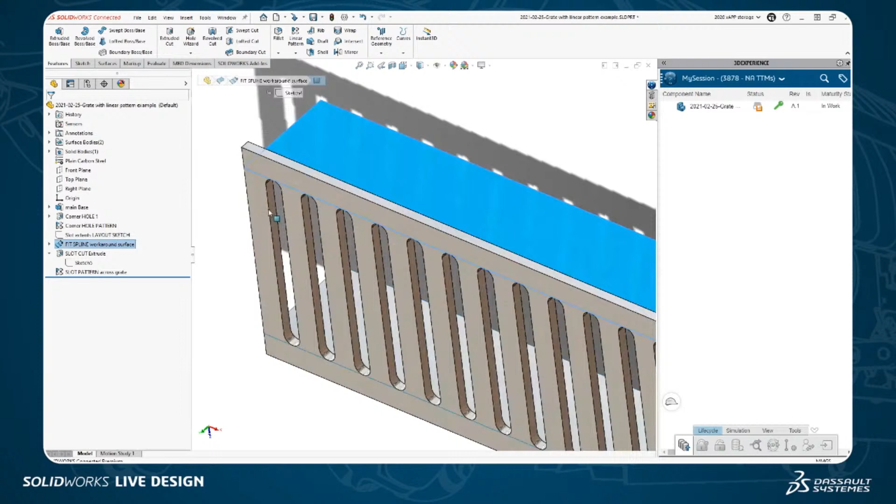And so what I ended up doing as a workaround was I just extruded a surface. This is a real common thing that we do when we're trying to find workarounds when splines aren't being nice to us. We can just go in and we can just make a surface, and then I could make a tangent to the edge of that surface.

So I think this is so powerful. I just wanted you guys to know if you ever find yourself in this spot, it's something where you can really save a lot of time, but you might need to use that workaround. It didn't take too long once I figured out what the workaround was, and then you're good to go.

Hey, Toby, I have a question here from CH35. This probably means something, and I'm not catching it. It says, instead of using the dimension for the direction, could you use a line within the sketch? Would that still give you the option to enable vary sketch?

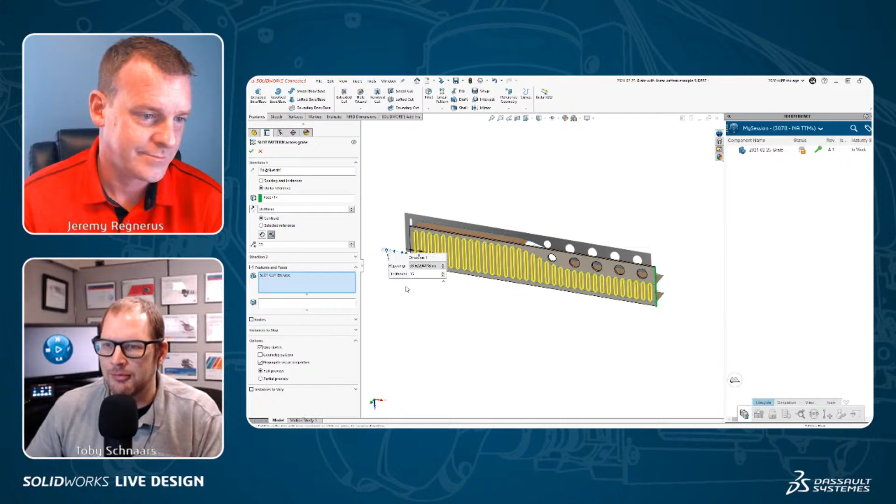That's a good question. I don't know the answer to that, and I think that it's kind of a moot point anyway, because when you click on the feature to pattern, the dimensions from that feature show up in the graphics area. So for example, here, let's say I've got this slot sketch, and I've got a line in the slot sketch. So let's say I'm just going to put a horizontal line down here, and I'm going to make that line for construction.

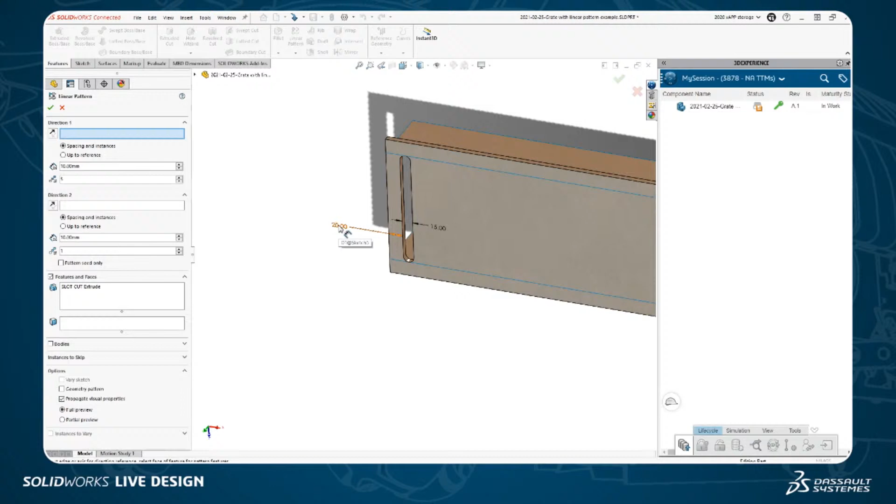So now I'm going to create a linear pattern of that feature. And so I'm going to click down here in features to pattern, and I'm going to click on this feature. You'll notice that the dimensions for that feature show up right away. And so when I go up here to click direction, I can easily just pick on that dimension, and that solves the issue of what direction is it going in, and it solves the issue of the vary sketch option becoming available.

Now, in order to do that same thing with an entity from the sketch, I'd probably have to show the sketch first and then go into linear pattern and then pick that feature. And that seems like it would be a bit of extra work, but out of curiosity, let's see what happens. Let's see if vary sketch does show up if I do that. So now I'll go into features here, and I'll pick the slot cut extrude. See, vary sketch still doesn't show up here.

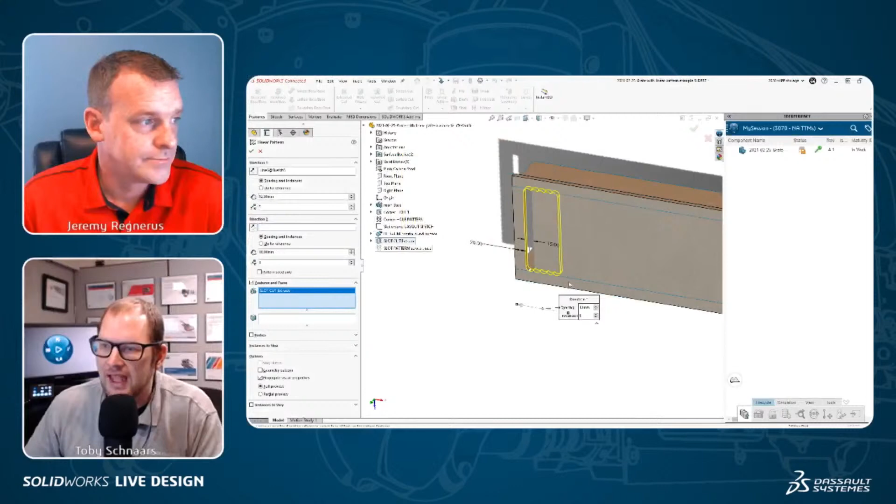It's still grayed out. So it's a good question, but I think you're going to be better off just picking that dimension, because one, you don't have to show the sketch, and two, that's what's going to ultimately allow you to use that vary sketch option. So then in this case, just so you guys can see this from start to finish, what I would do here is I would indicate the pattern spacing.

Maybe here, instead of doing a number of instances, I would just go up to reference. Right, and I could say that I want this to be the reference down on this end, and I don't want it to go all the way up to that reference. I want there to be somewhat of a gap. So maybe I'll make that gap 30 millimeters or 20 millimeters or whatever's appropriate. I'll say I want this to be a number of instances to define that pattern. I'm going to use the option for vary sketch, and hey, look at that, the preview even showed up. So awesome.

So now this is awesome. You've just shown the first thing you showed us combined with this capability. Yep. Like, that's really cool, the fact that you can mix and match some of these secrets of patterns. Did you hear what I just did there? I did. Toby? Yeah, I mean, that's the whole trick, right? That is the whole trick, is learning how to kind of combine some of these.

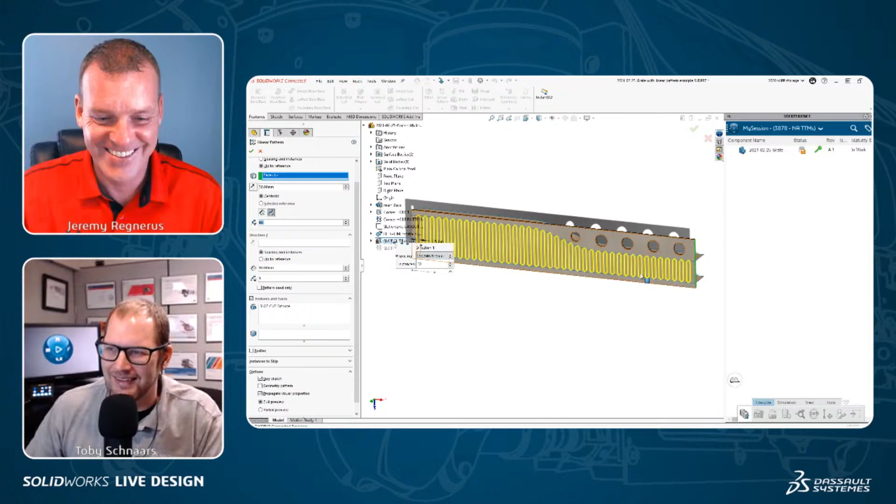When you're doing a crazy pattern like this, you're gonna really want to make sure that you are able to combine some of these different features. So you don't want to sit there and hand calculate what that is, especially if you're still designing that plate and it's still potentially changing in size.

Yeah. So I have another question from chat, and this is very serious, Toby. Okay, here we go. If you were a pattern, what type of pattern would you be? Oh, man. That's a great question. I'm going to have to think about that one.

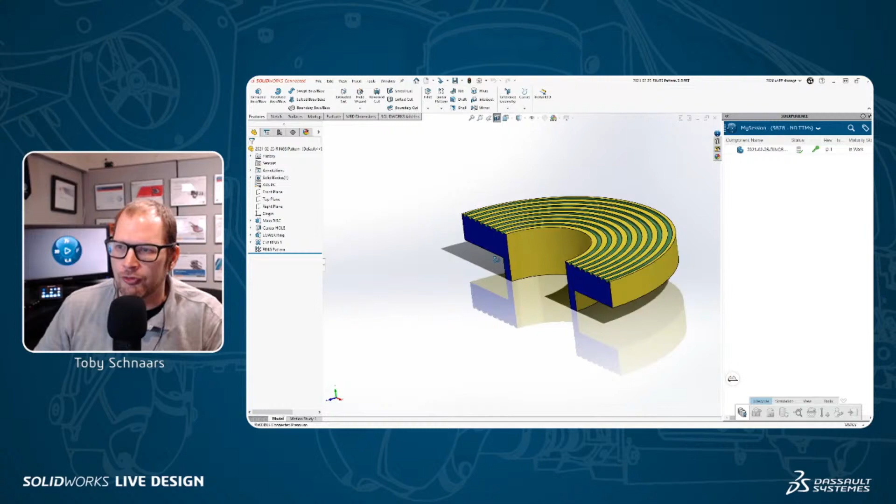That's a great question. So let's talk about another example here of vary sketch. And this is one that you might not even think would really be a linear pattern. But I actually got this question once in tech support. The question was, is it possible to do something like this in SolidWorks? Is there any kind of radiate pattern where you're going to start from the center and radiate outward, because we're making couplings that need to go together and need to have gaskets that go in them? How would you do something like this?

And so I thought about it, and I thought back to this example, and I thought to myself, I wonder if somehow I could use vary sketch and linear pattern to accomplish something similar here. And ultimately, that's the answer. If you're strategic in the way that you create that cut revolve, you can actually do a radiated outward ring pattern here, like what we're looking at.

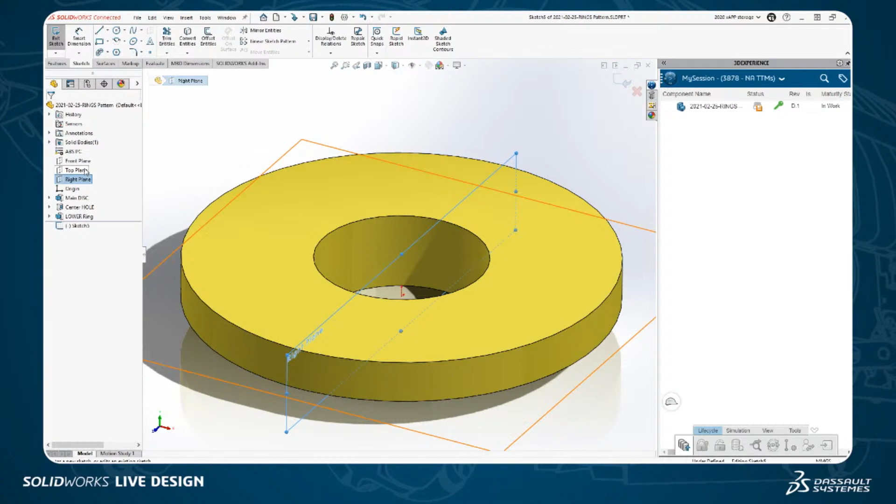So I'm going to delete these two features, and I'm going to jump into this sketch, and maybe I'll even make a new sketch just so you guys can see the strategy here. So I'm going to go to my right plane, begin a sketch, orient my view, and I'm going to create a small circle here, which is right on the top edge of the model. Let's say I make that 10 millimeters for that circle.

And then I'm going to create a center line that I'm going to revolve that small circle about, so that when I go to cut revolve that thing, I've got a center line to revolve about. Now what I'm going to do is I'm going to create a dimension.

Now this is where you have to be really strategic, because if you create the dimension to the center line, even if you don't cross over the center line, because you're revolving about that same center line, you're going to get a radius dimension. And what we want is a linear dimension.

And so what we'll see here is if we go to features cut revolve right now, and then we double click on this feature, we're going to have a radius dimension here. See, it's radius 60, and it's not a linear point dimension. Well, we need a point dimension if we're going to do a linear pattern.

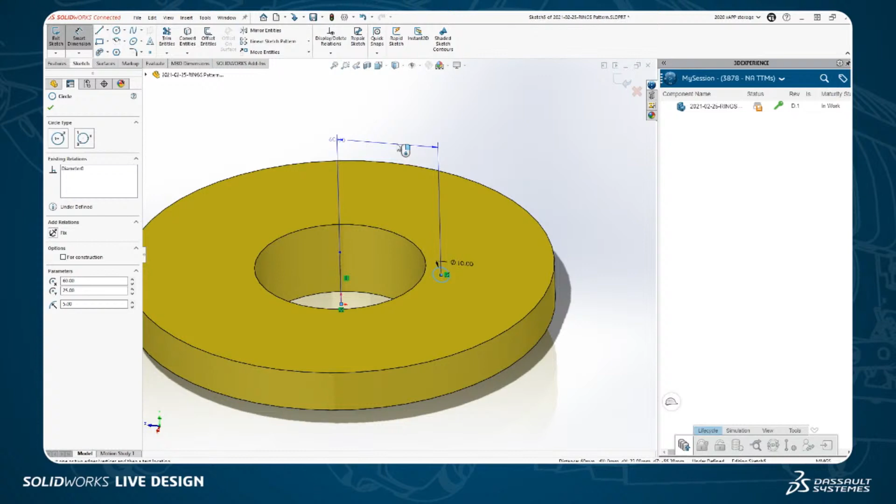So the strategy here, and this is kind of interesting, it's actually the opposite of the strategy I usually give people. Usually I tell people, be careful, make sure you dimension to the line, not to one of the endpoints. That way you'll get the double dimension, the diameter dimension or the radius dimension in your print. Well, here I'm going to use the opposite strategy. I'm going to say dimension to the endpoint rather than dimensioning to the center line. And that's going to leave you with an actual linear dimension that we can use when we go to create our pattern.

So you're going to see here that when we go into our cut revolve and we say that we want to create a linear pattern, we're going to be able to click on our direction one, and on that linear dimension of 60. And with vary sketch off, we would just be doing a linear pattern like this. So let's say we're going to do this at 5 instances with 12 millimeter spacing.

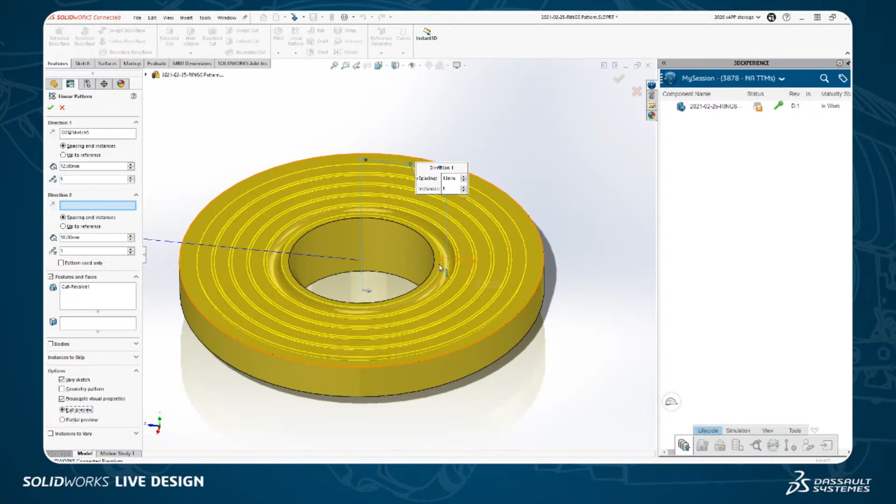But with vary sketch on and full preview on, we can see that SolidWorks is trying to do the linear pattern in this direction, but it's trying to maintain the dynamic sketch relationship from the original cut revolve. And so we end up with these rings.

I just had my mind blown, Toby. That's new to me. I did not know you could do that inside of SolidWorks. So isn't that so cool? That is killer. I love it. That's such a good tip. I did not know you could do that.

Now I have a question here. So when you were talking about dimensioning from the endpoint versus the line, because when you dimension to a center line, it creates a radius or a diameter dimension. Could you have also right-clicked on that dimension and changed it to a linear dimension at that point? That's a good question. I don't know the answer to that.

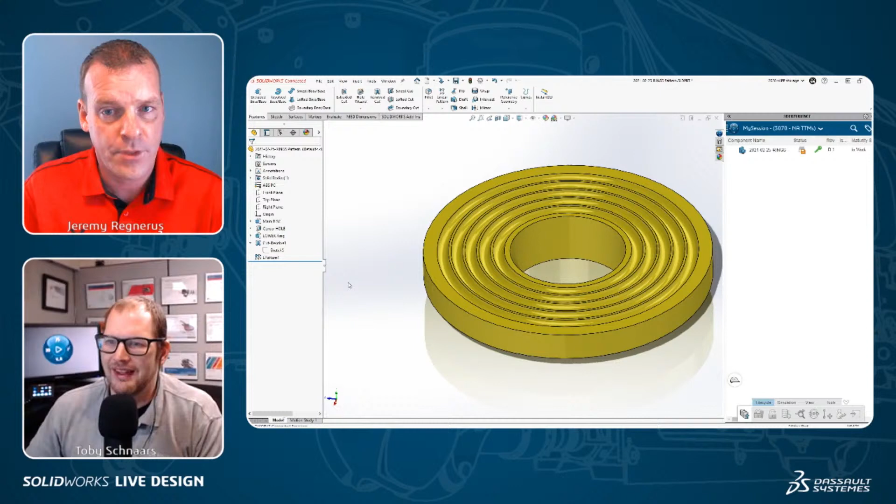Okay. The reason I ask, and I don't mean to give it so many plugs, but again, 2 weeks ago at 3D Experience World, we showed a delighter in the tech preview where they were toggling between radius, diameter, and linear dimensions without having to dig into a right mouse click menu. So this could be brought even more to the forefront in the future potentially.

Yeah, I don't know. I mean, it says here, you got the display options, center dimension displays diameter, show parentheses. If I go over to leaders here. Yeah, so maybe not. Yeah, it's interesting. And it is also dependent on the line that you use to revolve.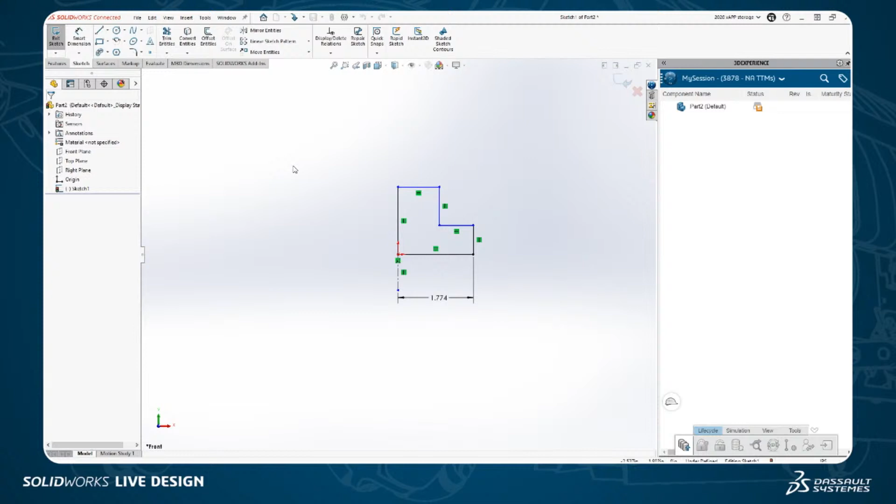So a strategy would be if you create geometry like this, and then you create a center line, and you dimension to the center line to get the double dimension, or even just to get the radius dimension. And then you go to features revolve. What happens is that sketch is being revolved about the center line, and the double dimension is going to the center line. So the dimension becomes a radius dimension or a diameter dimension.

But if you revolved about a different line than you dimension to, then that behavior does not occur. So if I revolved about this line, for example, then that will remain a linear dimension. So another strat might be to just draw a second center line, dimension to one, and then revolve about the other. But you're getting pretty nuanced at that point.

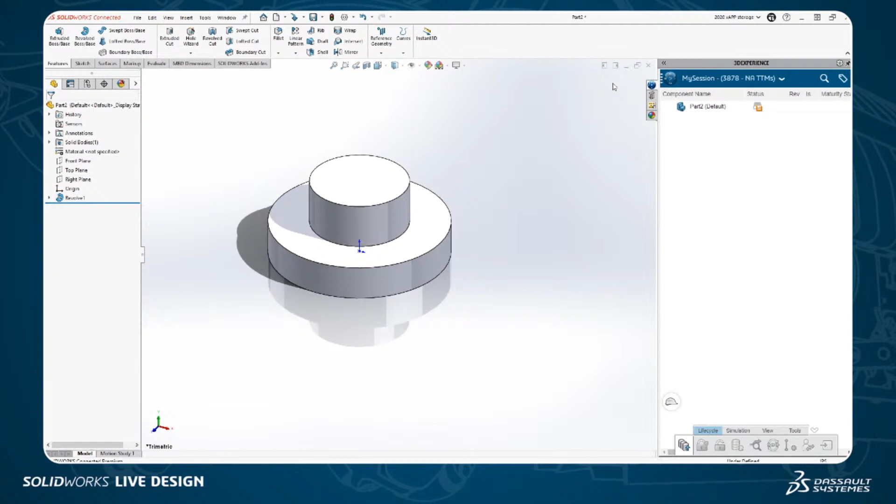That's where I thrive, in those little nuances. Those little percentage of a percentage improvements over time make for huge gains. That's my bag right there.

Yeah, I know we're coming up short on time, but there's a great question in here, and it's something that I think people see us do when we're on video all the time, and that's how are your dimensions just popping up?

Do you have it enabled to see all the dimensions? Why, when you select on 3D geometry, do your dimensions show up? I mean, I'm just double clicking really quick. That's it. If you have Instant 3D turned on, then you can. That's what I wanted to show people, that Instant 3D makes it really easy whenever you select on a feature to pull those dimensions up.

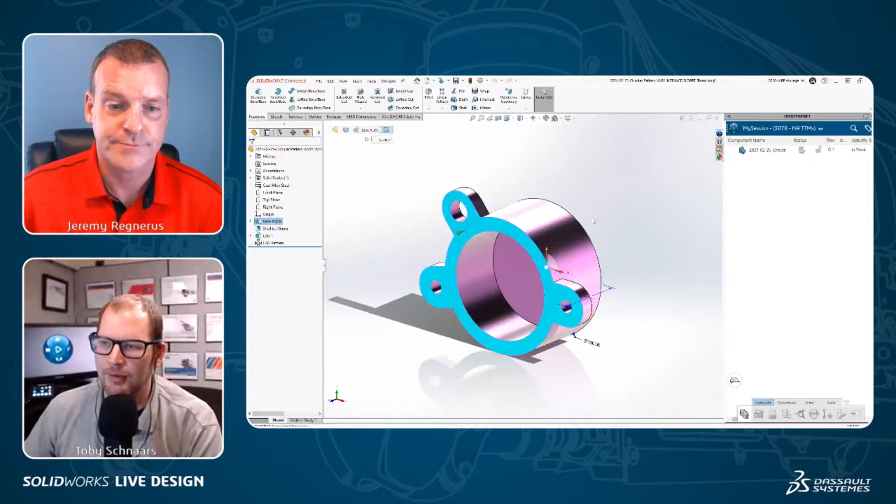Yeah. My beef with Instant 3D is that I always end up relocating planes by accident. So that's kind of why I end up having it turned off. But I'm not saying it's bad. And there's spots where I have it on. I really like the way that it auto updates. Like when I'm looking at the mass of a part and I'm trying to really dial in a mass, having Instant 3D on and then just being able to single click and then make a change.

Oops, one of my coworkers is potentially working on this model, or they don't know that I'm working on it. So I'm going to right mouse button over here and say reserve. And that way now they know I'm working on it. That's why I was getting those read onlys. The system's protecting me from accidentally making changes.

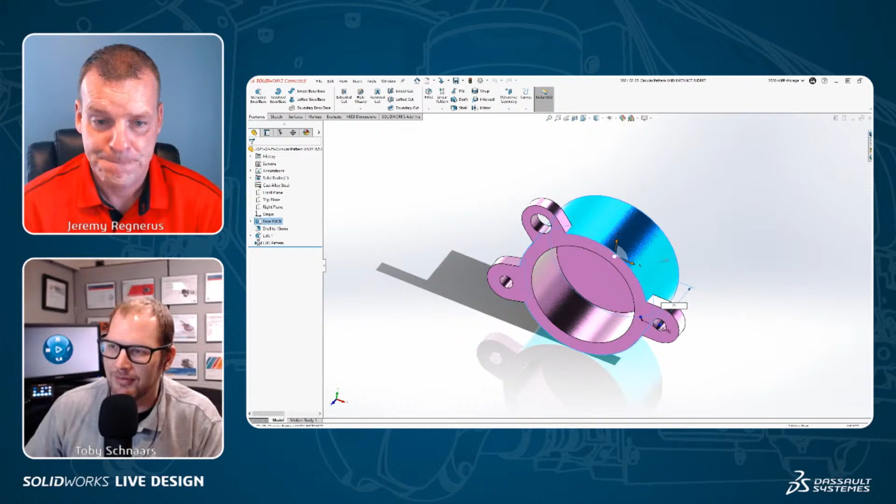So now that Instant 3D is on, I can just single click here and say I want that to be 75, enter, and it just updates. I don't have to rebuild. Most of the time what I'm doing is double clicking, going to 50, and then pressing Ctrl+Q on the keyboard to update it.

So this is a bit of a philosophical question, because I am an Instant 3D guy. I like Instant 3D when I'm working. You told me you don't. So this is what's great about SolidWorks. Work the way you want. Yeah, exactly. I think a lot of these tools are situational. People will be like, do you have this turned on? Do you have it turned off? A lot of it's situational, except for Instant 2D. I never have that one on. Shout out to Instant 2D.

All right, now we're going to go to our final topic here, which is the vary instances option in a pattern. So far we've talked about the ability for a regular pattern to dynamically update with your end conditions. We talked about the idea that vary sketch lets you enable a mode where your sketch dynamic relationships will propagate through into your pattern instance results.

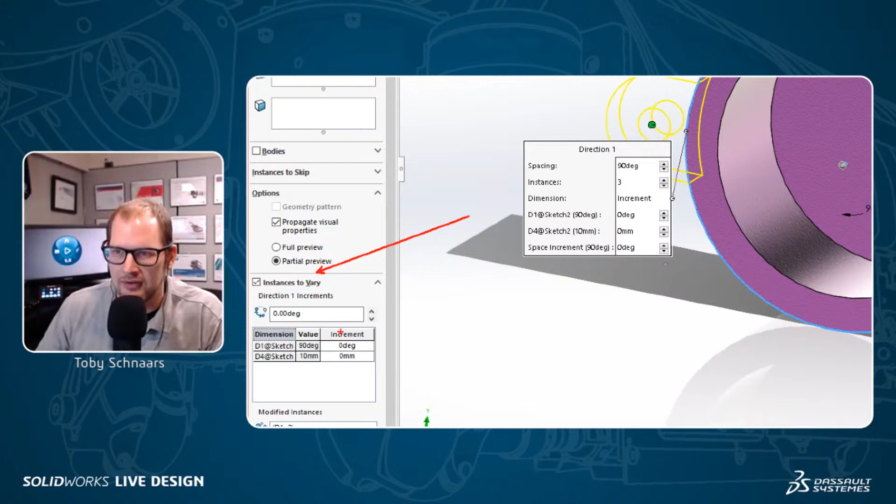Now we're going to talk about something really cool called instances to vary. Instances to vary shows up at the bottom of the property manager, and it allows you to pick different dimensions or even just the vanilla pattern spacing and adjust those independently from one instance to the next. One scenario where this came up was, is it possible to create a circular pattern but not have equal spacing for all the instances, almost like a variable circular pattern?

Of course, we have a full-blown variable pattern tool, but right within the circular pattern command, we can do this. We can go to circular pattern, say that we want to pattern this lug about this edge of the model. And you can see that by default, we're going to get 3 equally spaced instances. Oops, geometry pattern on was causing me a problem. We're going to get 3 equally spaced instances.

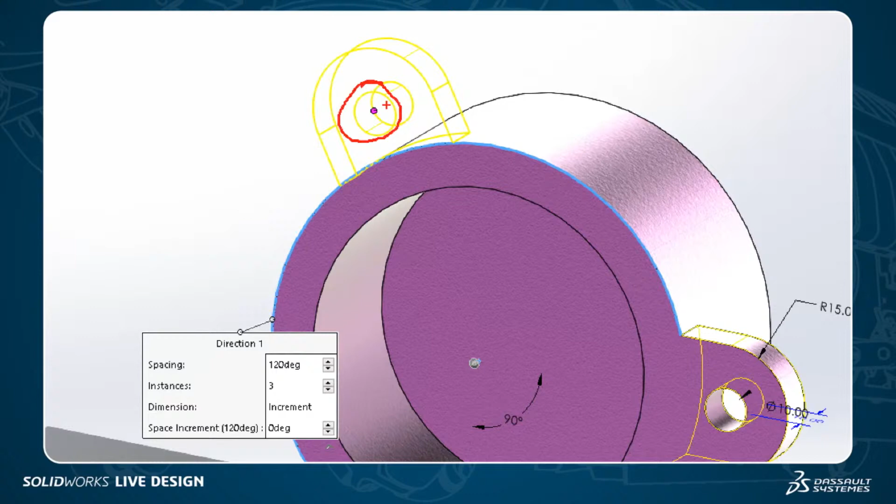What we can do is come down here to where it says instances to vary. With instances to vary, you get these little magenta dots right at the middle of each instance of the pattern. You click on that magenta dot and say modify instance. And the only parameter that we have indicated can be modified is the location of that instance.

So I'm going to say I want that to not be at 120, but at 155 degrees. And then I'm going to come down to this magenta dot and say modify instance, and I want it to be at 175 degrees. Maybe that's not a good dimension. So I'm going to say I want this one to be at 220 degrees. Okay, there we go.

And so now we can hit the green check mark and you can see that you can have non-uniform spacing when you go to create a circular pattern, for example. Now, this can be taken to another level when it comes to doing a linear pattern, because you can actually do a linear pattern and a revolve in one step.

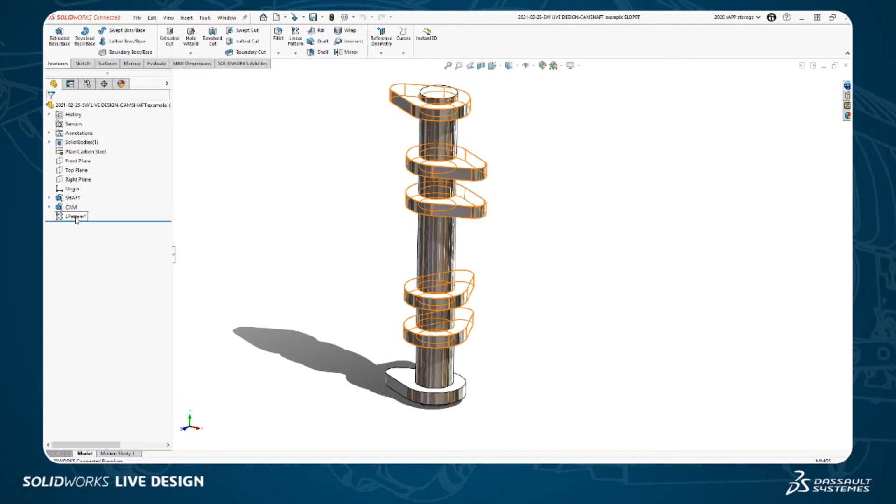And so this is the camshaft example that I use for the thumbnail for today's session. And I'm going to delete this linear pattern. And actually, before I delete it, you'll notice here I'm getting non-uniform spacing from this linear pattern. This isn't instances to skip. I'm not going in and using instances to skip. What I'm doing is I'm saying I want the distance between these instances of the pattern to vary, to be different from one instance to the next.

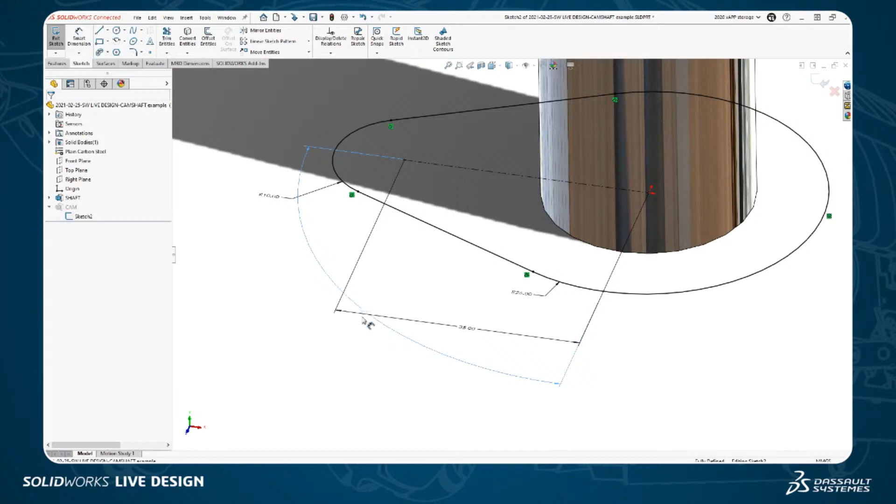Beyond that, I'm also going in and saying I want the rotational angle to change for that cam as it goes up through the pattern, all in one single linear pattern. So the way that we can do that is we can say that we want to create a sketch of the cam using a dimension for the angle. So here's this dimension for the angle. So I've got this 90-degree angle on the horizontal, what would be the horizontal location of the cam. In other words, if I change this to 45, you can see that the angle of the cam changes.

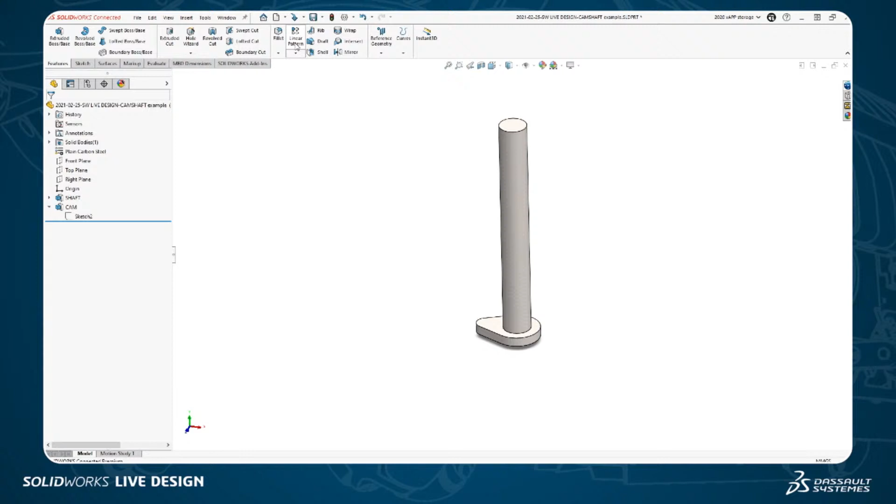So I'm going to now choose to perform a linear pattern command. For the direction of the linear pattern, I can actually choose this cylinder here, which is kind of cool. It picks up on the axis of that cylinder. For the feature to pattern, I'm going to choose this feature here. Here you can see that for the spacing of the pattern, I'm going to say that I want the spacing to be maybe a little bit more, and I'm going to say there's the number of instances. And then down here where it says instances to vary, well, we talked a moment ago about how I can click on any one of these and I can change the spacing, right?

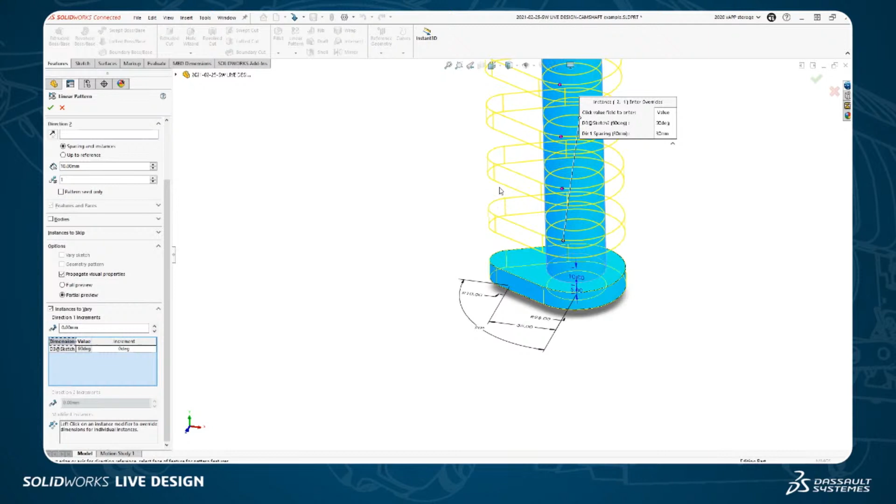But what I can also do is I can come down into this dialog box here where it says choose feature dimensions to vary in direction 1. All right, well, what dimensions do I want to vary? I want to vary this angle dimension here, this 90 degrees. And what I can now do is for any of these instances, I can choose to change that 90 degrees. But what's even cooler is that I can actually do that overall at an incremental value. So I could say I want that change to be 30 degrees per instance. And if I click here on full preview, you can see that now what I'm giving myself is a spiral staircase in one single linear pattern command at the feature level.

That's pretty powerful by itself right there, that ability to change that rotation. But you also showed the spacing between the instances too, right? You do the spacing between the instances. You could do really any dimension that you have in that sketch, or the spacing from the feature pattern as well. Like in this case, this linear pattern here of the holes. So this corner hole pattern here in that grate example, what this is doing is it's doing a modify instance on this instance of the hole here, where what I'm doing is I'm changing the diameter of that hole.

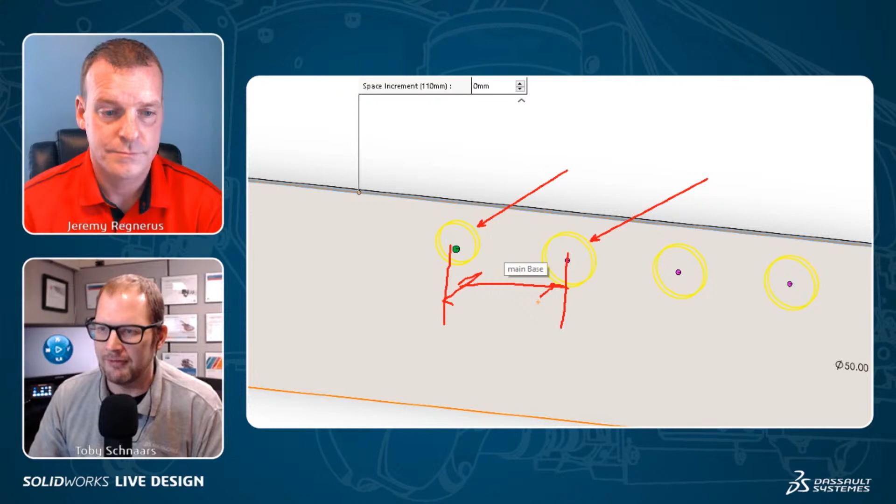So there's a sketch dimension for the diameter of the hole. I'm changing the diameter, and I'm also tightening up the spacing just a little bit on that last one. So I'm modifying the spacing and the diameter. What would you have to do otherwise? You would create this pattern, and then you would go in and make one additional cut extrude where you'd manually put in those dimensions. You don't have to do that. You can just do it all in one feature pattern.

Man, so I think that's pretty much it, Jeremy. What do you think? I love it. There was so much cool stuff here for me to... I got to sit back, hang out with you, Toby. I learned some new stuff today, which is always great. I always want to do that.

You haven't answered the question, Toby. If you were a pattern, what kind of pattern would you be? I think I'm a man of consistency, Jeremy, so I'm just going to stick with flat pattern. That's my go-to. Yeah.

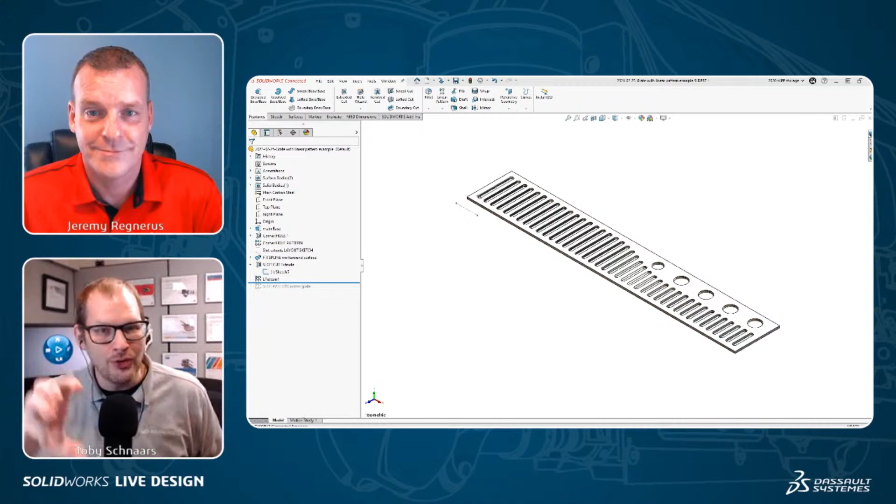You actually mentioned something at the very end that gave me an idea for what I would like to present. I want to do something on library features, actually, I think. Oh, man, I love library features, too. So powerful. It takes a little bit of time, maybe a few hours, to learn library features, to really learn the nitty gritty. And then hundreds and hundreds of hours that you can save by learning how to leverage them. Yeah, love library features.